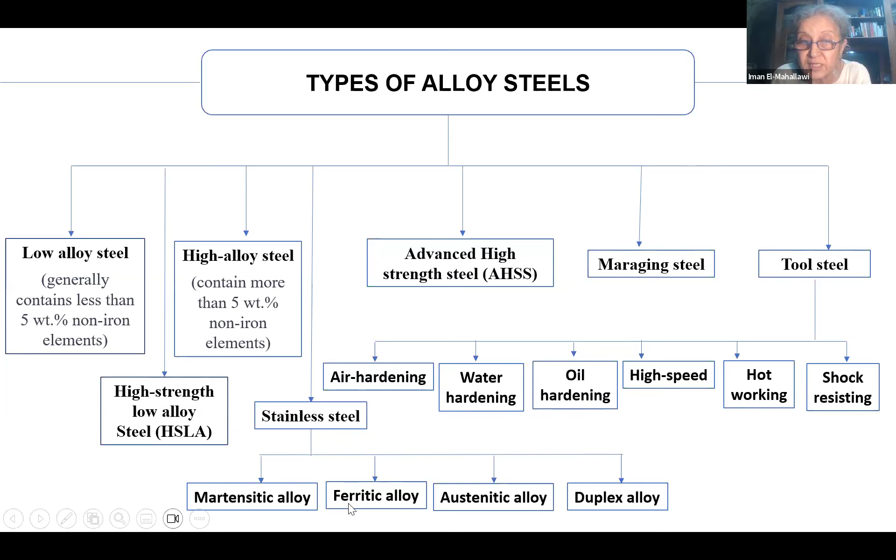So this is, from the scientific point of view, designation based on alloying elements and content.

We cannot skip the importance of designation. We have to understand the grading system because many engineers working in the market know steels by their designations. There are many designations to describe alloyed steels, but we shall focus on the AISI grading system, given by the American Iron and Steel Institute, and the Society of Automotive Engineers, the SAE. This is the one that most of us would have learned during engineering studies at university.

So it is a numbering system. The designation is a numbering system where you give a certain number. Usually the first number, from 1 to 9, refers to the type of the steel. Then you have 3 digits where the last 2 refer to the percentage of carbon, and the one after the first digit describes the other alloying contents in the steel.

Usually the grading of 1 is the carbon steels, 2 is the nickel steels, 3 is the nickel chromium, 4, which is very well known and common in the market, is the molybdenum steels. Then we have the chromium steels as 5, 6 are the chromium vanadium steels, 7 are the tungsten steels, 8 are the nickel chromium molybdenum steels, and 9 are the silicon manganese steels.

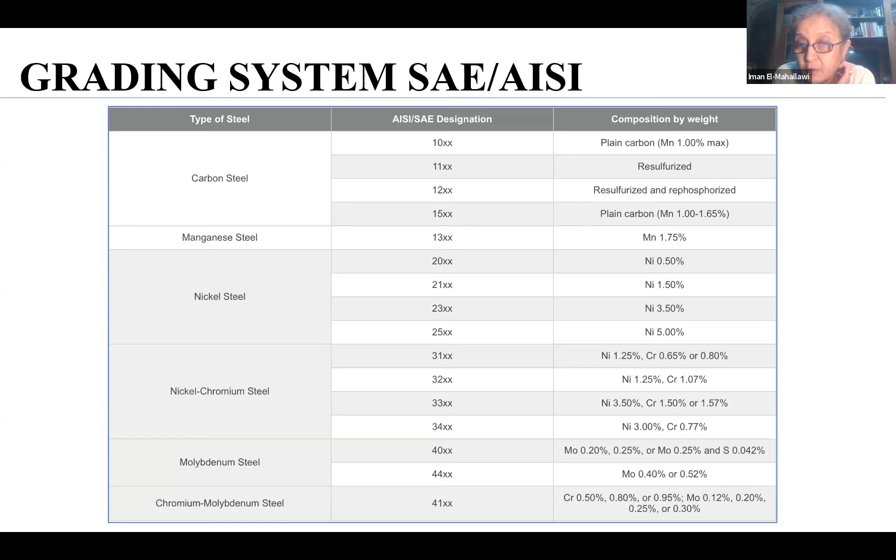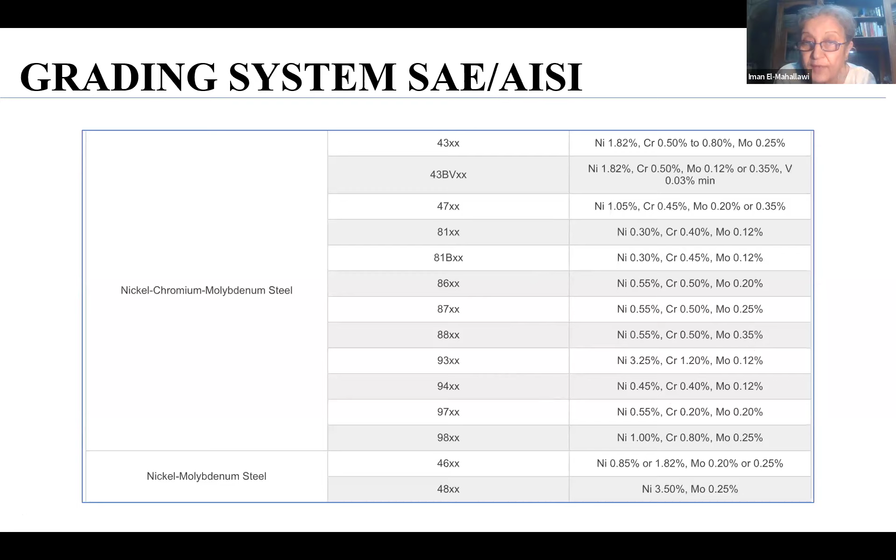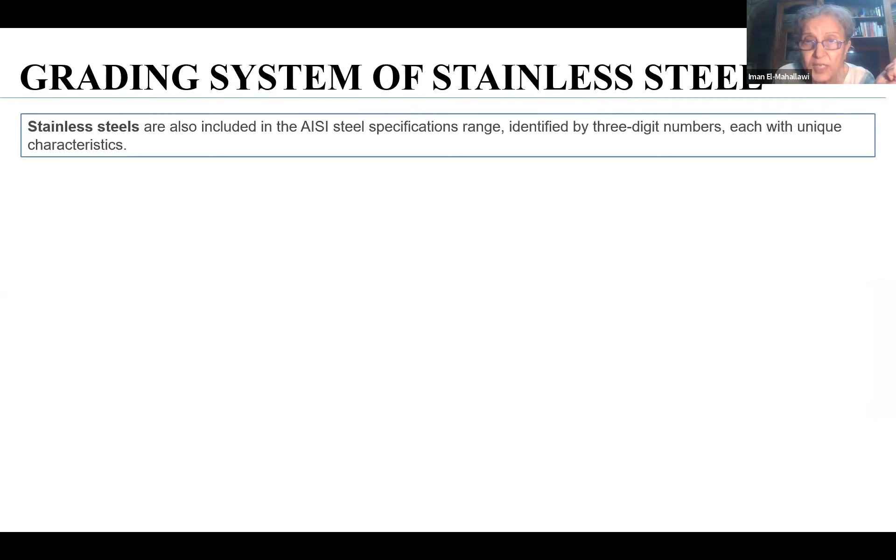So the stainless steels are included, as I've just mentioned, in the AISI steel specification range, identified by the 3-digit numbers, each with a unique characteristic.

The stainless steels have another grading system, also in the AISI, where we have the austenitic stainless steels, usually characterized by containing both nickel and chromium, and the structure would change to be austenitic. There is no time to review the iron-carbon phase diagram here, but we should remember that iron with carbon would be ferritic or pearlitic or whatever. When we add alloying elements, we get changes in this typical microstructure of iron, and we can promote the formation of other phases, just like austenite is promoted with a certain addition of nickel and chromium in a certain range.

And we have the well-known austenitic stainless steels, famous for surgery applications and home utensils and many other applications. Ferritic stainless steel grades are a little bit harder and stronger than the austenitic stainless steels. They are used for many engineering applications as well, and they would contain higher content of chromium at the expense of nickel, because nickel is an expensive element. So when we need higher strength and maybe different corrosion conditions, we can use them.

We also have the heat-resisting chromium alloys for high-temperature applications, martensitic precipitation stainless steels, the 600 group, the precipitation hardening groups, and the duplex stainless steels as well. So we have many different alloy steels.

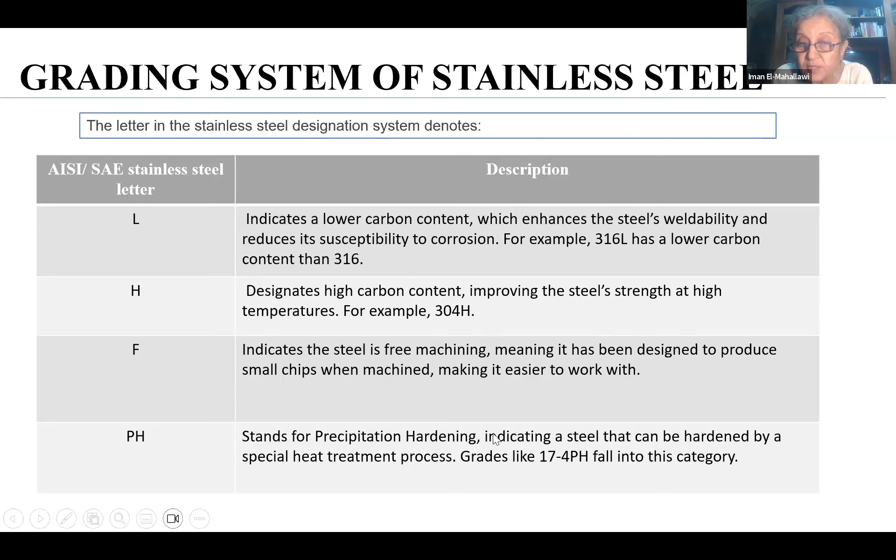In stainless steels, we should not forget that we have another suffix at the end of the number, which is L, H, F and PH. Usually the L would be low carbon or extra low carbon, the H would be high carbon content, the F will indicate the steel is free machining, and the PH stands for the precipitation hardening groups.

So this was regarding explaining the designations, and usually the designations are provided or developed by big institutes and societies. On top of them are AISI, ASTM, and ANSI. They are leaders in making and developing the grading and designation system for the alloy steels. And of course, we all know the standards and standard specifications that we have to abide by in validating steels for applications.

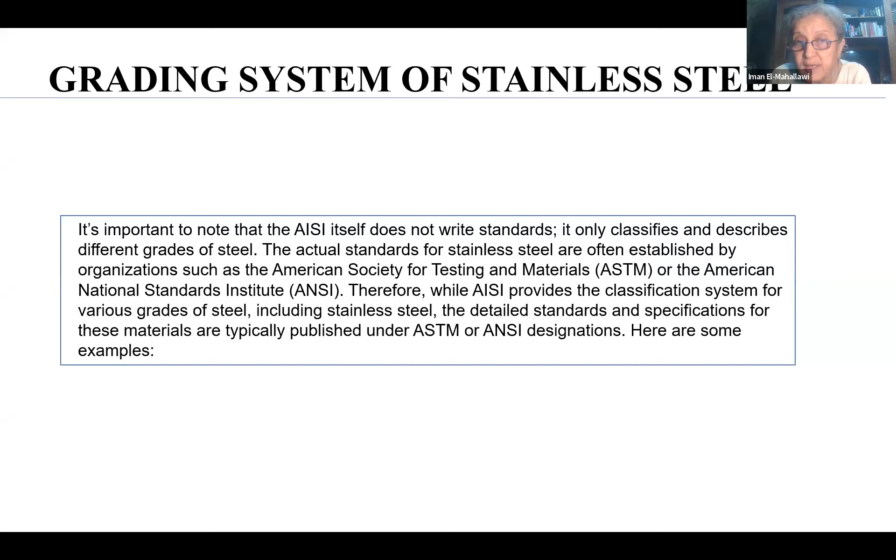We rarely add them to steels except for special conditions when we need, for example, machinability - then we may add some sulfur, but usually they should be kept at a very low value or concentration. This is the challenge with alloyed steels, because in carbon steels we may have a wider or more generous range for sulfur and phosphorus than in alloyed steels, and because their harmful effect is pronounced more on the properties of the alloyed steels if present in higher than the required values.

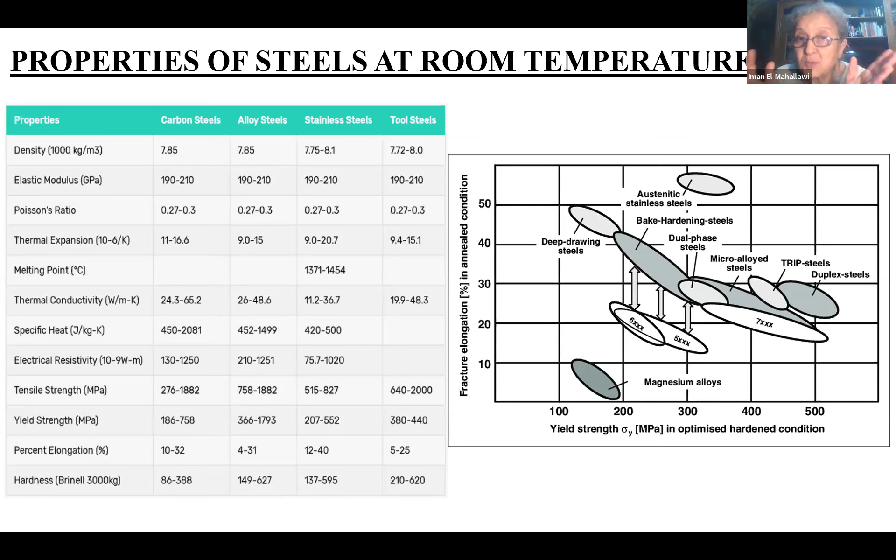Now, why are we talking about this? What's the importance of having alloying element content, microstructure, or phase? The importance is to obtain the properties we are looking for. The most important properties we look for in alloyed steels are high strength, toughness, ductility, corrosion resistance, wear resistance, and these are associated with other properties like thermal conductivity, specific heat, and electrical resistivity. Engineers think more about mechanical properties, but should not forget that increasing strength may deteriorate toughness, affecting other physical properties that should not be overlooked according to the application.

In many occasions, the designation would identify the specific steel type used for a certain application, whether valves, bridges, construction, or low pressure vessels, depending upon the required property relevant to the application, whether high strength, high strength with high toughness, or high strength with a certain amount of ductility.

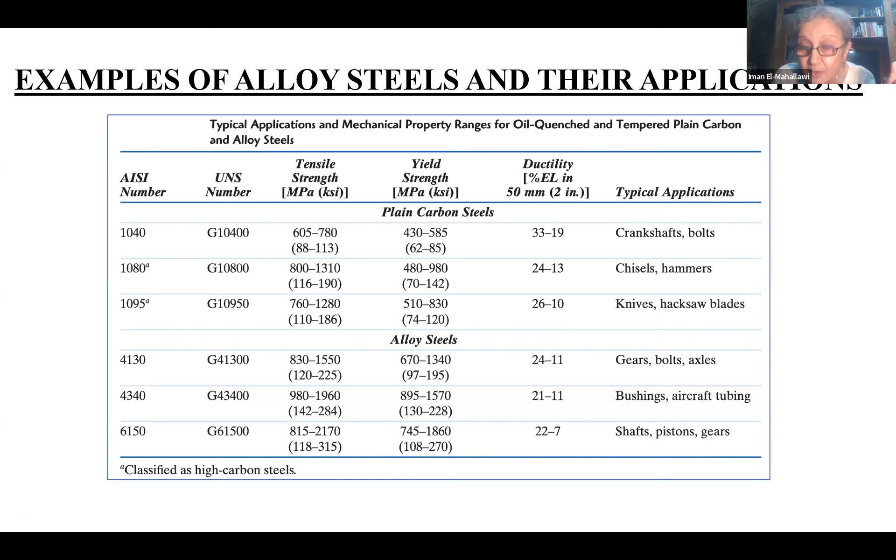And that's the driving force—why do we need alloy steels? That's why we are glad to have this event, to inform the market that we need alloy steels as much as we need carbon steels.

This presentation includes more examples for different conditions, and maybe the new term appearing here is 'annealed.' When we talk about alloyed steels, we should not forget that alloy steel is not only a matter of alloying elements—heat treatment is a very important challenge to achieve the required properties. You can never achieve your properties just by having the recipe for chemical composition; you have to have controlled heat treatment.

The most interesting thing is that you can have a wide range of properties depending upon the heat treatment. From the same composition, you can have strength no more than 400 megapascal, or controlled heat treatment can make you achieve strength more than 1000 megapascal. The whole idea about AHSS, advanced high strength steel, mentioned at the beginning of the lecture, is simply control of heat treatment.

You can double, triple, and quadruple the strength properties and control strength with toughness, because when we increase strength, this is usually done at the expense of toughness. But you can control both strength and toughness to exceed very high values just by controlling heat treatment. In this context, let's have a little revision—we need to remember the science and technology of heat treatment, which includes processes such as annealing, quenching or hardening, tempering, and now other treatments like quench partitioning and bainitizing, along with many other non-conventional methods apart from the three we learned at university: hardening, tempering, and annealing.

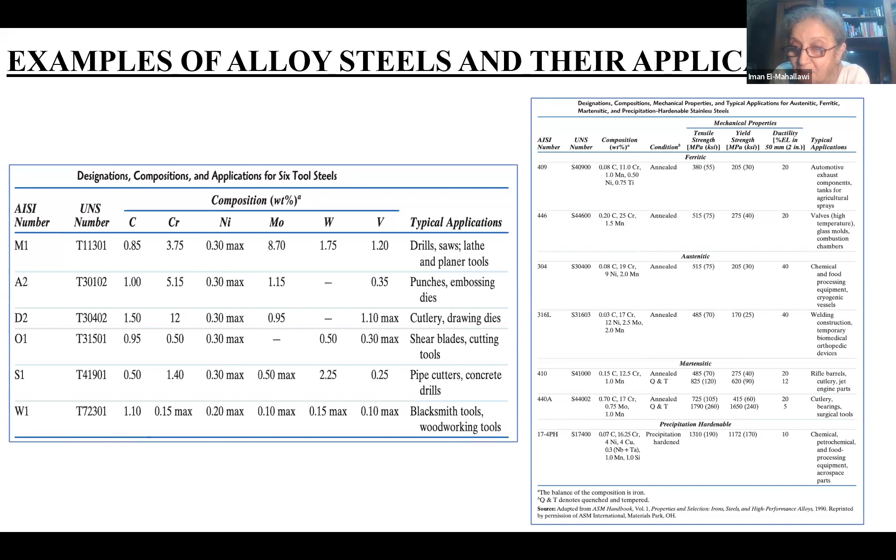Of course, this picture is just for showing the whole range of alloyed steel applications that we can obtain or achieve by alloy steels. So what is the challenge? If it is so simple, what's the problem? Why can't we produce it?

Actually, the challenge in producing and manufacturing alloy steels is associated with the production process. The production process is not as simple as carbon steels. Some steps are common, like charging, using the electric arc furnace, chemical analysis, and refining in the ladle furnace. But then you also have to charge the alloying elements, and you have to calculate and make calculations for the right alloying elements.

In many occasions, you need a vacuum degassing step, because you have to eliminate all the sources for entrapment or tramp elements presence. You have to get rid of the oxygen and hydrogen and other things that may get into the steel. You may need wire feeding, argon gas rinsing, and other processes before you pour your product and take it to either the continuous caster or the forging process.

So we have one challenge during the melting and production process, and another challenge during the heat treatment. If the heat treatment is not controlled, you do not get the properties that you want. Of course, the manufacturing and heat treatment would be manifested in a microstructure, which makes us achieve the properties we are looking for.

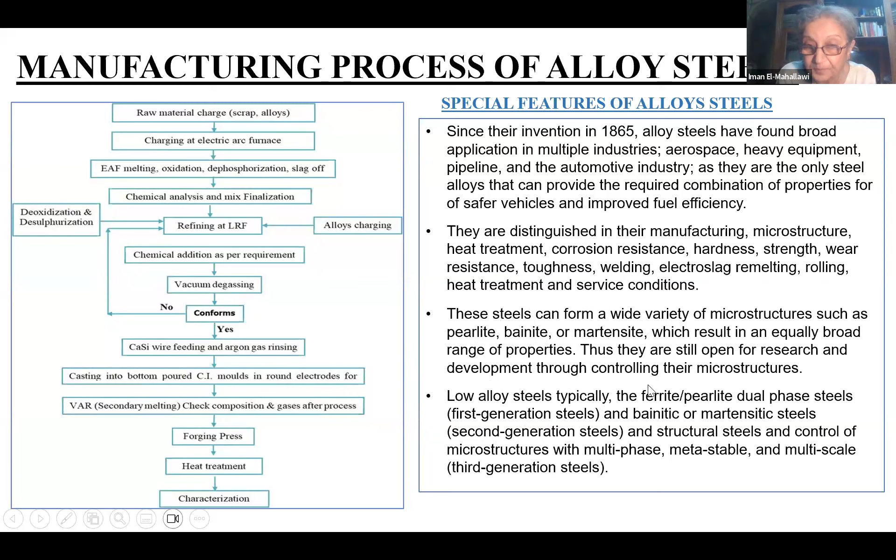So this manifestation is actually obvious in the new grades of steels. We had the first generation of steels which were highly ductile, but the yield strength was low. Whereas the second generation, we could achieve high yield strength, but at the expense of ductility and toughness. The third generation steels that are now investigated and actually in the market are like TRIP and TWIP.

Transformation-induced plasticity and twinning-induced plasticity, quenching and partitioning - all these groups of advanced steels can achieve strength and toughness exceeding 2 times the conventional types of steels, despite the fact that they are based on the same chemical analysis.

Just a quick reminder of the heat treatment processes that we have learned earlier: annealing, normalizing, hardening, tempering, mar tempering, and austempering, bainite forming - all these should be kept in mind when we plan for producing alloyed steels of special properties.

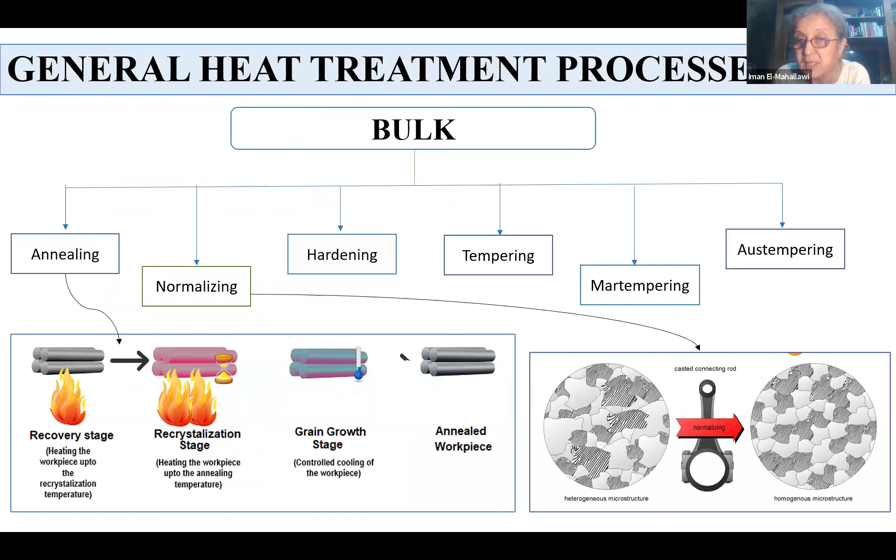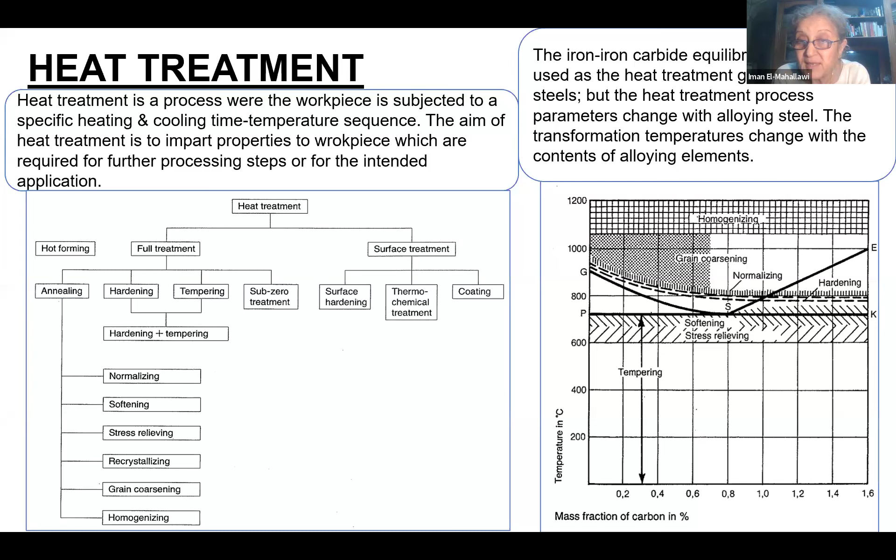Again, a flow chart as a reminder for those who have forgotten heat treatment, and of course the phase diagram is important in this aspect. Here is an example of a typical heat treatment process for alloyed steels, where you can find that you need 2 stages of hardening, 2 stages of cooling, and tempering in many applications, unlike conventional carbon steels where you do not need this stage.

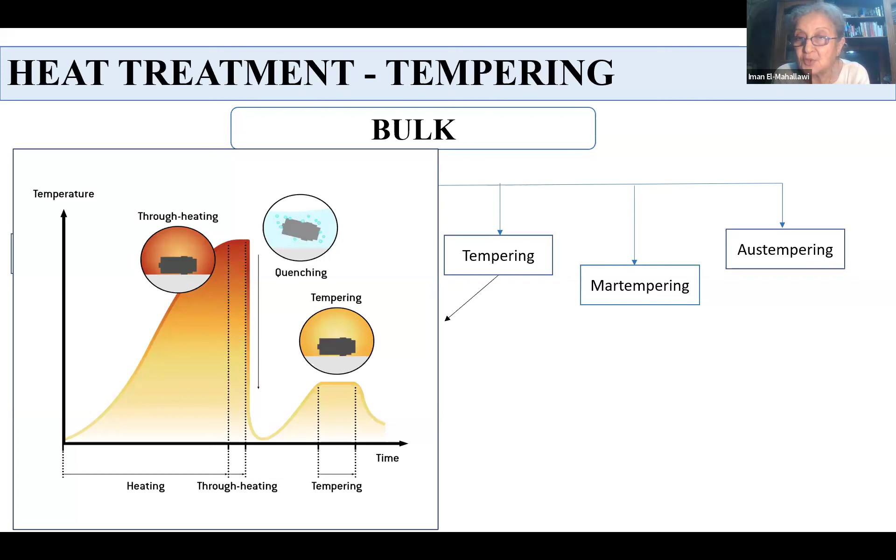Other examples for different alloys. Okay, maybe mar tempering and austempering are not very well known, but they just mean that we temper in the range of martensite, or we temper in the range of austenite, to achieve the microstructure that we need.

We also always have to remember that sometimes over-tempering may produce some defects, because we get secondary carbide formation, which may harm the toughness of the material. So we should actually control not only the hardening stage, but also the tempering stage for achieving the required properties.

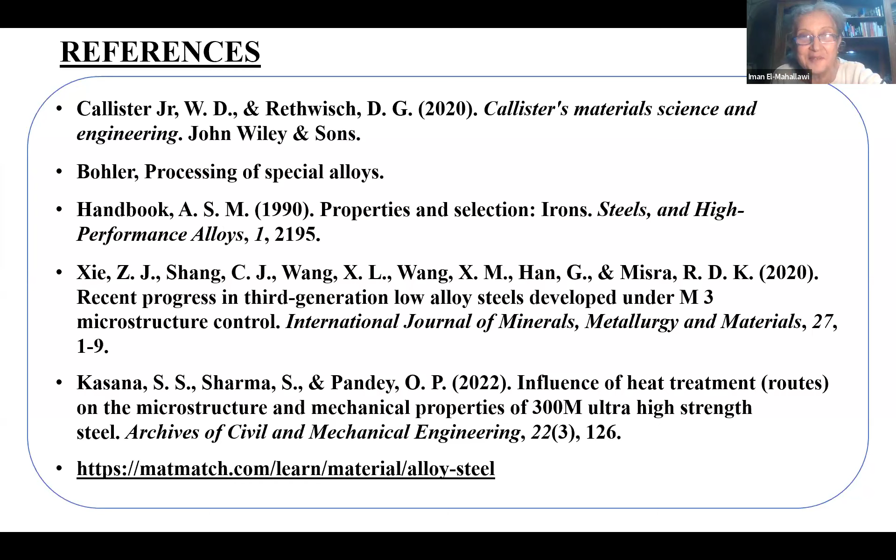Thank you. Thank you, Dr. Iman. This is really very, very good presentation. It reminds me of a lot of stuff from during my studies at university. I have a question for you.

So in the United States of America, there is a trial to make something called high strength steel. This is mainly for automotive, to use very thin, light sheet in the automotive industry. Can you give us an explanation of what high strength steel is, and what is the idea to approach this in industry?

Yeah, of course, doctor. I do not live in the United States, but I know these advances are happening, and this group is generally called AHSS, Advanced High Strength Steels. The idea is that you control the heat treatment and chemical analysis to obtain, for example, transformation-induced plasticity. You develop alloys by controlling the alloying elements and heat treatment, so that with heat or deformation, you will have extra properties added. Instead of losing the property, you gain additional properties through transformation, where one phase transforms to the other.

First of all, we will speak about what is the special steel. There was a good introduction done by Dr. Mahallawi. When we are speaking about the definition for the special steel, to be clear for everyone, it is the target to have the clean steel of gases and non-metallic inclusions.

And this cleanliness should be done starting from the scrap till all the production procedure, until reaching the final product to be suitable for heat treatment, to reach the actual desired mechanical properties and grain structure, which is already specified from the end user, because special steel always goes to the end customer for its special application.

If you are talking about the main characteristics of special steel, first, as normal, is the chemical composition. For each kind of steel, we have to control strictly the chemical composition for every grade. Some grades are very large for the end customer, then they are asking to have this one in a tight, specific limitation for some items. So it should be considered because it affects its final application.

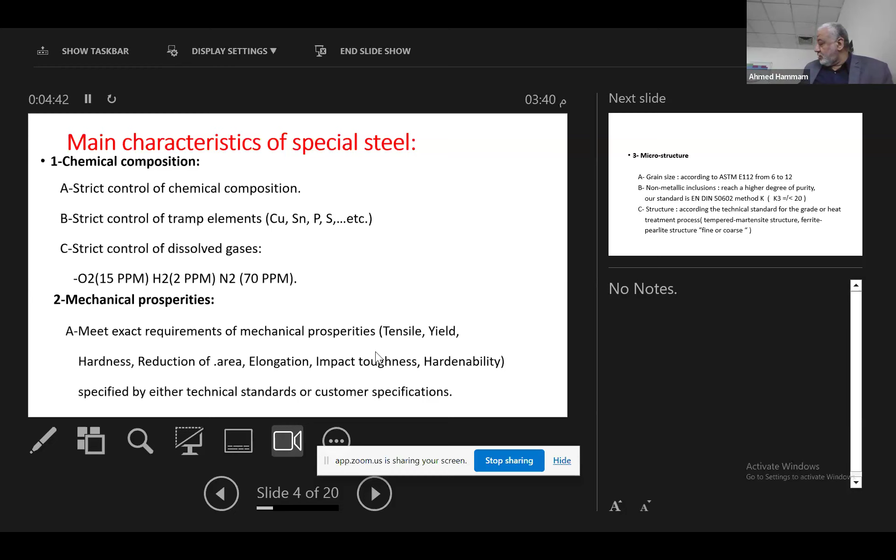You always say special steel is for a specific application, because you can produce the same steel grade suitable for more than one application. And this variety of applications gives a limitation for each component of the chemical analysis, and also for final mechanical properties like the tensile, hardness, reduction of area, toughness, and impact toughness. All this is controlled and gives the results appropriate to the end customer.

The third one is the microstructure. We have to be very keen to keep the grain size and the shape of the grain in a manner that there is no distortion, and it should be according to the ASTM standard from 6 to 12. Also, the definition for the grain size should be controlled according to the final application. You can always say final application is the master key to succeed in special steel.

The second part for the microstructure is the non-metallic inclusions, which should be of a higher degree of quality. We keep the standard of K3 approximately equal to or less than 20. The structure should be adjusted even during production on the line itself, or afterward by heat treatment, in order to keep the desired microstructure with the desired grain size.

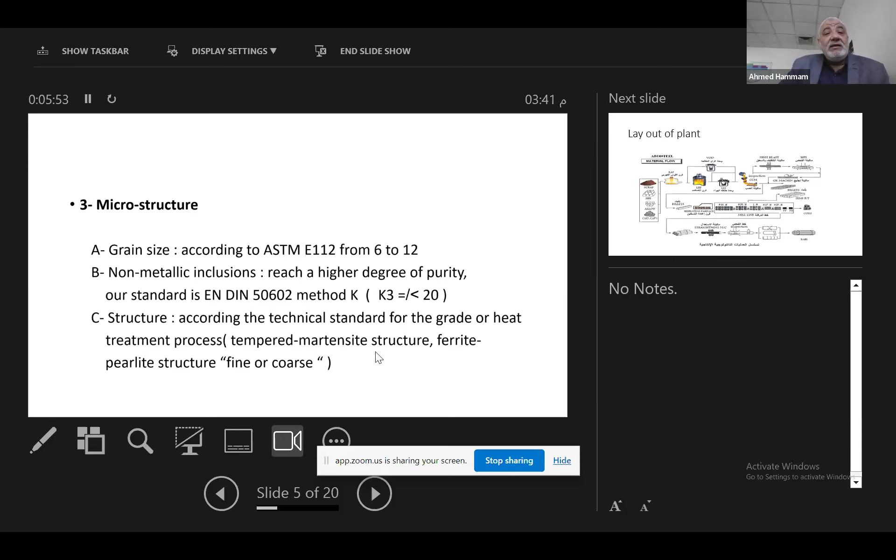If you are looking to a plant operating special steel, first of all we have to be keen about the scrap segregation. The scrap segregation should be done according to the chemical composition of the scrap and the desired steel grade we need to produce. So we have to have the scrap divided into stainless steel scrap, high manganese scrap, high chrome scrap, like this. It should be segregated well, and if the segregation is done well and arranged for each steel grade, then the results will be much easier in the electric arc furnace.

After that, in the electric arc furnace, normally you get rid of the phosphorus and sulfur, and after that, putting the steel in the ladle furnace. In the ladle furnace, we can control the chemical additions for the different alloys in order to reach the desired final chemical composition.

After the ladle furnace, we are going to the vacuum degassing. After the vacuum degassing, the billet is coming from the CCM machines, which is considered also some items to be considered for the casting. It's a closed casting for the special steel.

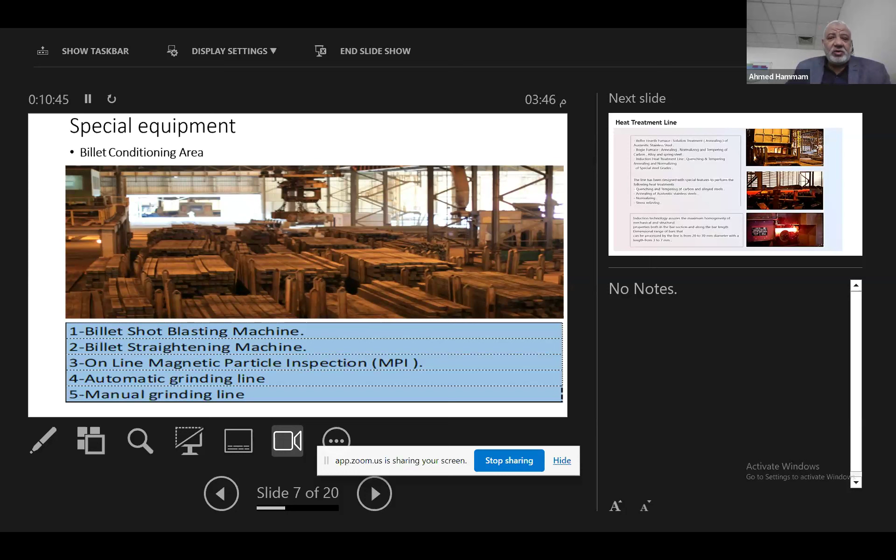The online magnetic particle inspection, MPI, should be done for this one, and the automatic grinding or manual grinding according to the case of the billet.

Speaking from the in, we have to speak about the out, meaning after the final product, we can make all the post-heat treatment for the material. For this, we have around 3 kinds of furnaces. The first one is the solution furnace for the treatment by annealing austenized stainless steel.

The second one is the bogie furnace for annealing, normalizing, and tempering, alloy and spring steel and others. The last one is the quenching and tempering, which gives good results according to the special application, especially for the automotive industry. For this, we have the quenching and tempering, and we can also do annealing for austenite stainless steel, normalizing, and stress relieving, to ensure that by the induction we are getting the constancy of the structure and the mechanical properties along the bar cross section and the length of the bar itself.

The main task, I think, is the vacuum degassing and the continuous casting. These two items are the critical items in special steel production application.

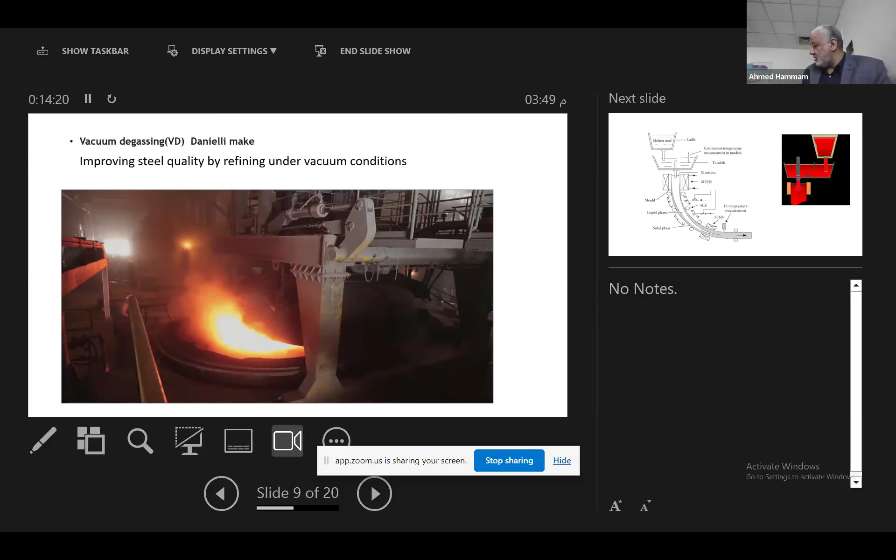After that, we are going to the continuous casting machine, which starts by the molten steel in the ladle. So there should be a shroud between the ladle and the tundish, and also another shroud up to the mold. So it's a closed casting procedure.

By this procedure, we can control and ensure that the final results will be in good condition, followed by the first and secondary stirring in the mold to keep homogeneity for the final product.

Now we got the materials that we already nominated according to the standard and produced for these steps. If we can get here the same as already presented by Dr. Iman in the previous presentation for the material - here we are speaking about carbon steel and alloy steel. 5% is approximately the ratio for low alloy and high alloy percentage ratio.

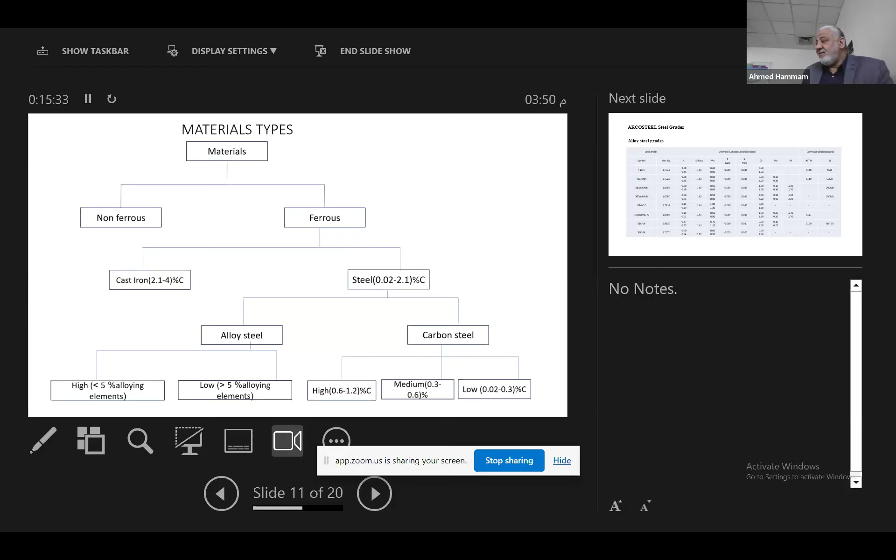For the carbon steel, we have the high carbon steel, medium, and low carbon. These are examples for the grades, which are classified according to some applications.

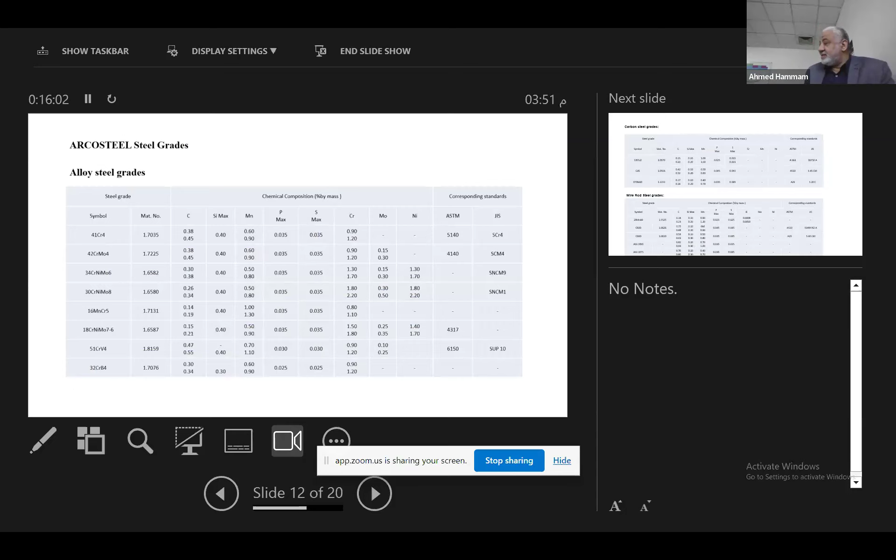So these are the alloy steel grades, the different kinds of steel grades: 42 chrome moly 4, 34 chrome nickel moly 6, 30 chrome nickel moly 8, 16 manganese chrome 5. All these depend on this as an alloy steel for special application.

The carbon steel grades are S355 J2, which is commonly used for a lot of applications in automotive, C45 and 70 manganese 20.

The wire rod steel grades are slightly different because they reach up to the AISI grades 1085, 1075, used for wire drawing applications like the sleepers for the railways, used for strands also, and this wire application.

The free cutting steel grades should be controlled, and for free cutting we always depend on increasing the ratio for the sulfur, which is known.

Also the grades of tool steel like 56 nickel chrome moly V7, this is one of the famous tool steel grades. The bearing steel 100 chrome 6, which is a critical one to reach casting under

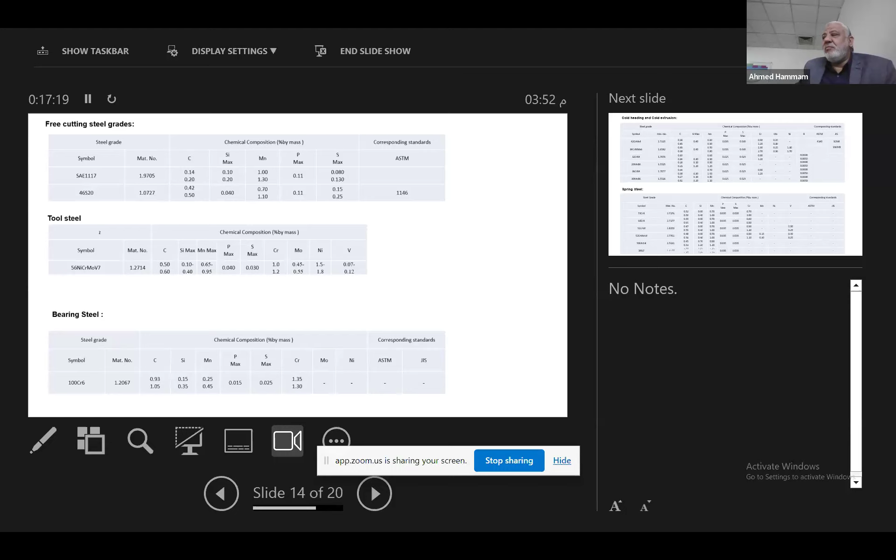1% of carbon. The cold heading and cold extrusion steel grades are also produced. The spring steel 55 chrome 3, which is normally used for automotive spring plates, 60 chrome 3 also.

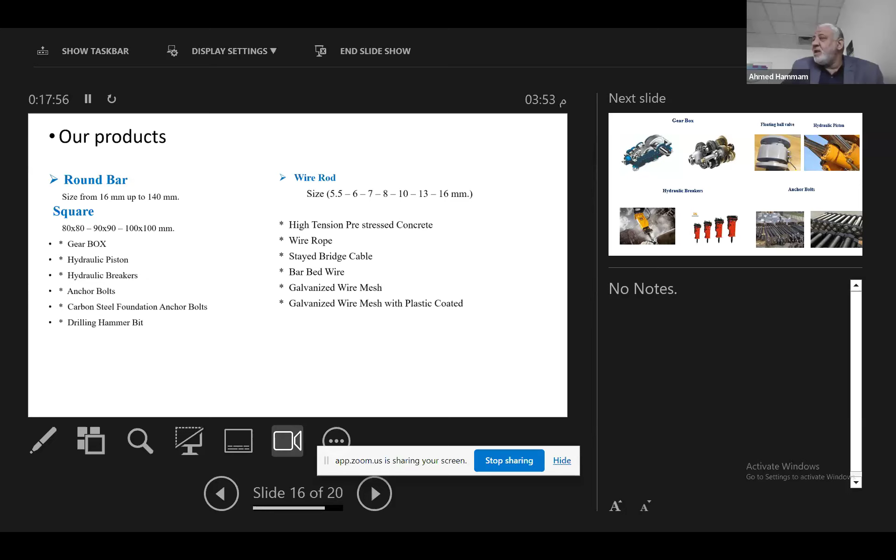The products are divided into round bar, which is produced in Arco Steel from 16 millimeter up to 140, and the square from 80 by 80, 90 by 90, 100 by 100, and the wire rod sizes from 5.5 up to 16 millimeters. The application for the bar mill is concentrated on hydraulic pistons.

It's used from the bars, the floating ball valves - by the way, this one is produced from our production, and we are proud to have this also made in Egypt.

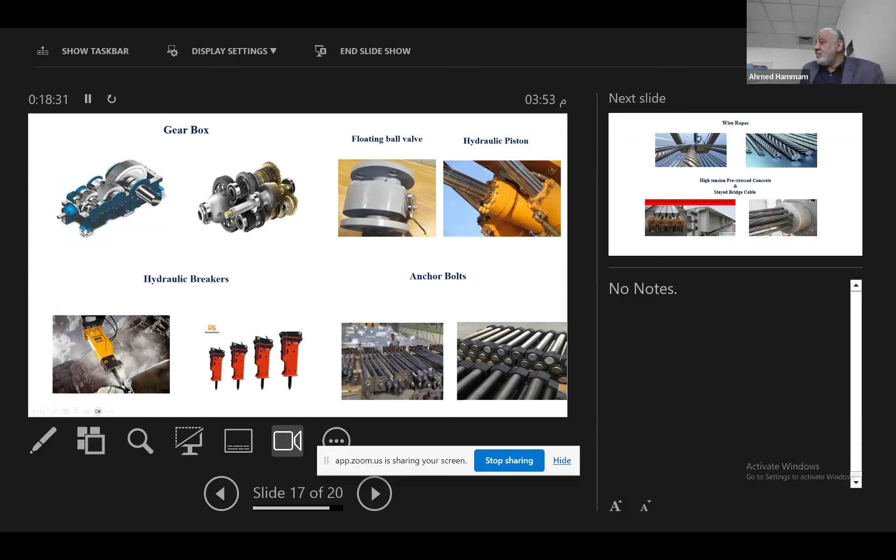The gearbox axis, we are producing the grades for this one. The hydraulic breakers for different applications and for mines, and the anchor bolts for different application also.

For the wire, there is wire rope and PC strands, and now we can say there is a boom in producing wire rope and wire drawing, and they have PC strands, which is giving good results. Also, the applications for this one go for construction purposes and bridges.

If we can speak about the achievements on steel production, we can say that we have to be very careful during the production of special steel, because if we sacrifice some quality items or overdo the cost reduction, then the final product could not reach the desired level of quality.

We aim to get cost reduction by segregating the scrap with very tight and constrained rules to get a good melting profile. So we segregate the scrap as stainless steel.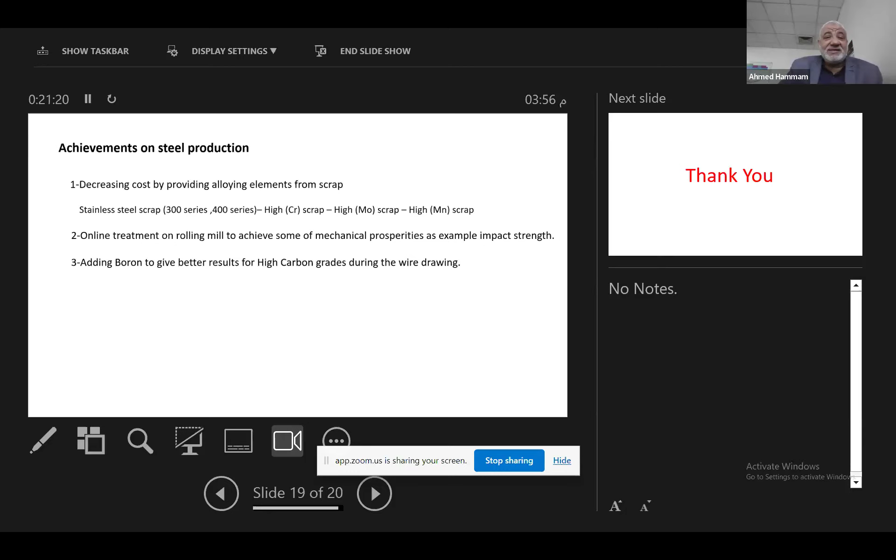1670 megapascal. Thank you very much. Hope that I can introduce something about special steel during this short time.

Thank you very much, Mr. Hammam. Really very good presentation, practical from the steel plant. I have some questions for you. First question from my side.

The big challenge for steel producers, especially steel producers, is that you have thousands of grades, and every grade needs to go to the customer with different shapes, thousands of shapes. So sometimes customers need a small quantity of this shape with this grade to go to this customer, and another customer needs something else. How can you deal with this logistically? How can you produce different kinds of steel, thousands of grades, thousands of shapes, based on customer demand? How can you make this balance in the production site? Actually, it is one of the challenges for the manufacturer of special steel.

Really, you are getting to the harmful point for this kind of production. You are correct. We have a lot of requests, maybe not exceeding 5 ton, 7 ton, 8 ton from one grade to the other. So we are doing like a puzzle, which is taking a long time, keeping in mind not to increase the number of size changes during the rolling, which has reached around 55 to 60 changes per month, which is huge for any rolling mill, affecting the final

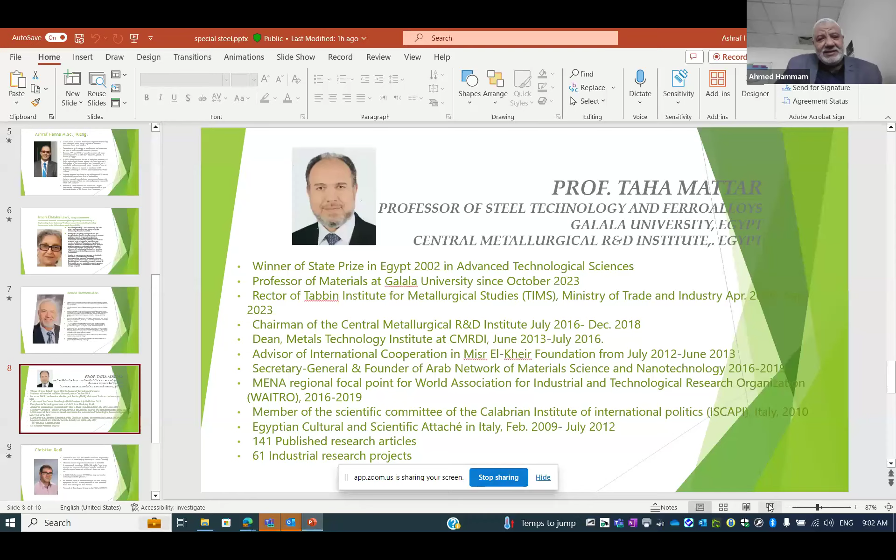Thank you very much, Mr. Hammam. The third speaker here is Dr. Taha Matar, who also has a very famous name in most institutes talking about steel. He's a professor of steel technology and ferroalloys at Galala University. He's also head of the Central Metallurgical R&D Institute in Egypt.

Dr. Matar is the winner of a state prize in Egypt in 2002 in advanced technology science. He's a professor of materials at Galala University since October 2023. He's also head of the Tabbin Institute in Metallurgical Studies, Ministry of Trade and Industry. He was chairman of the Central Metallurgical R&D Institute from July 2016 to December 2018, dean of Metal Technology Institute from June 2013 to July 2016, advisor of International Cooperation in Misr El Khair Foundation from July 2012 to 2013, secretary general and founder of the Arab Network of Materials Science and Nanotechnology from 2016 to 2019, and a member of the Science Committee of Calabrian Institute of International Politics.

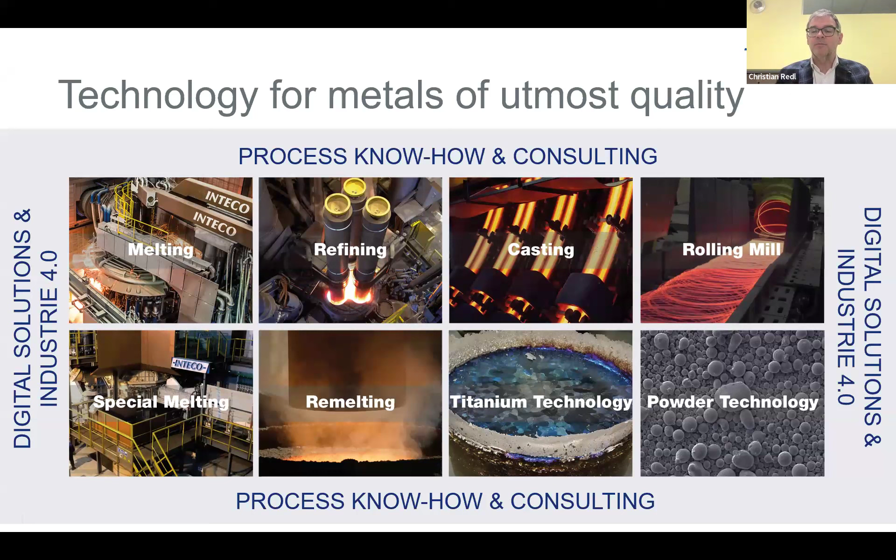Besides that, we also supply equipment for titanium technology and metal powder production. We are located in Austria, with our head offices in Bruck an der Mur, surrounded by some steel plants in Austria like Voestalpine, Bohler, and so on. We were founded as a consulting company in 1973 and have since developed into a complete equipment supplier. We are globally active with 10 subsidiaries around the world, with a turnover of approximately 80 to 100 million euros per year.

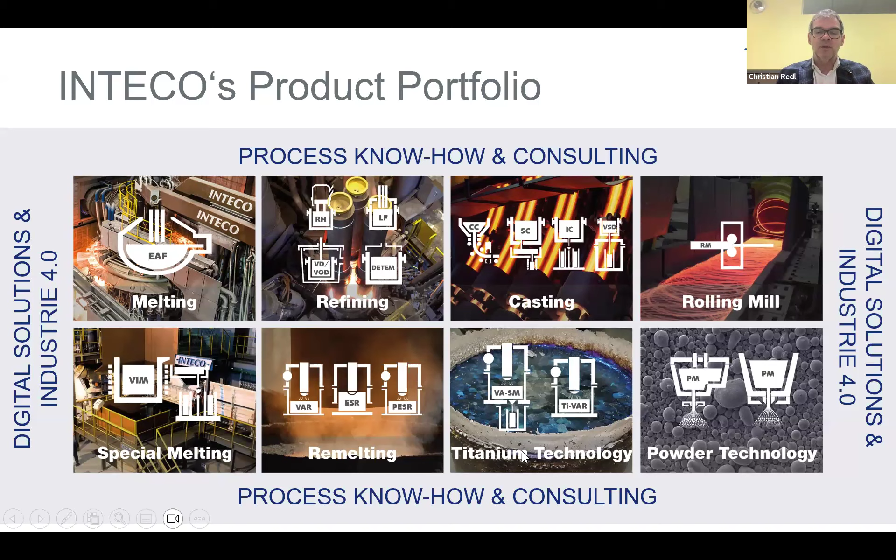As I said, we cover the entire production route for steel making, starting usually with the electric arc furnace, and then we have the entire portfolio for refining equipment like ladle furnaces, RH plant, VD, and tank degassing facilities. We also have in our product portfolio all kinds of casting facilities, and then remelting and rolling mill, but I will skip this for this webinar.

Of course, this has also been addressed by Ahmed and Professor Iman in their previous lectures - why we do vacuum treatment. In the very early days, it was mainly done to reduce the hydrogen content in castings, which is still done today for forgings, rail steels, or heavy plates. This was the main driving force in the early days. Then came the invention of ultra low carbon steel grades, which can be efficiently produced by decarburization under vacuum to carbon contents below 30 ppm or less.

And of course, sorry, go back one - the low oxygen partial pressure under vacuum favors carbon oxidation over chrome oxidation, which is very important if you're producing stainless steel or very high alloyed steel with high chromium content. The reason is simply that if you're blowing oxygen to reduce the carbon under atmospheric conditions, you will oxidize a lot of the chromium you added as an alloying element.

If you're producing mainly stainless steel, you might go either for the AOD process, and if you're also producing tool steels or a mixture of steels, then you do a vacuum treatment like VOD, vacuum oxygen decarburization. Nowadays, a lot of steel grades like interstitial free steel, deep drawing steel, and tire cord steels require nitrogen contents as low as maybe 30 ppm as well.

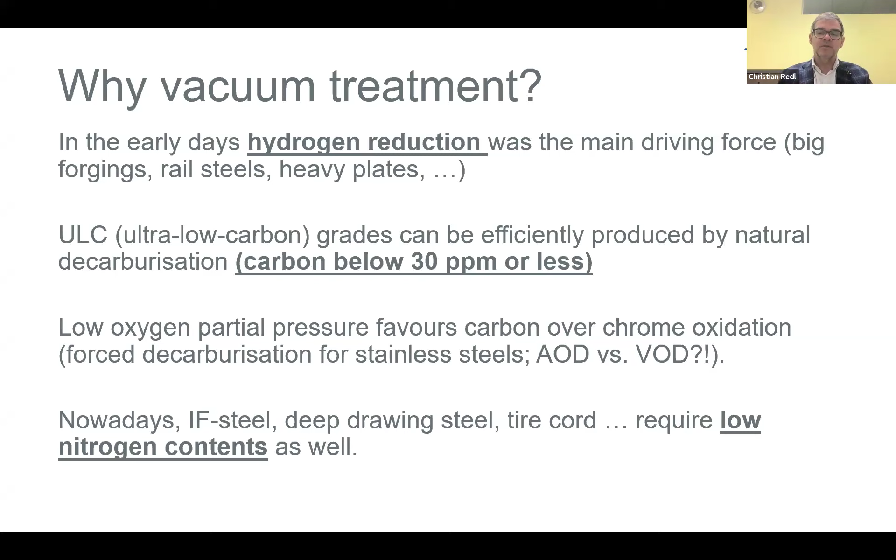There have been a lot of different degassing technologies introduced over the years. Vacuum treatment has been used already since the early 1930s with some pilot plants.

In the very early days, there was a lot of ladle stream degassing and vacuum ingot casting, shown here on the top left side. This is nowadays mainly used for large forging ingots, very large ones. The biggest plants built are around 700 tons. Here you're mainly trying to reduce the hydrogen content.

For the integrated mill, which is supplied by a blast furnace followed by a BOF converter, there is mainly RH degassing or DH degassing. These are circulation type processes, whereas more or less state of the art for alloyed or high alloyed steel production are the ladle treatment processes, like vacuum tank degassing or vacuum ladle, which we call the DETEM process. I will show you later some slides about it. Or also the VOD, where you combine a ladle tank degasser with an oxygen lance to blow oxygen and make a forced decarburization.

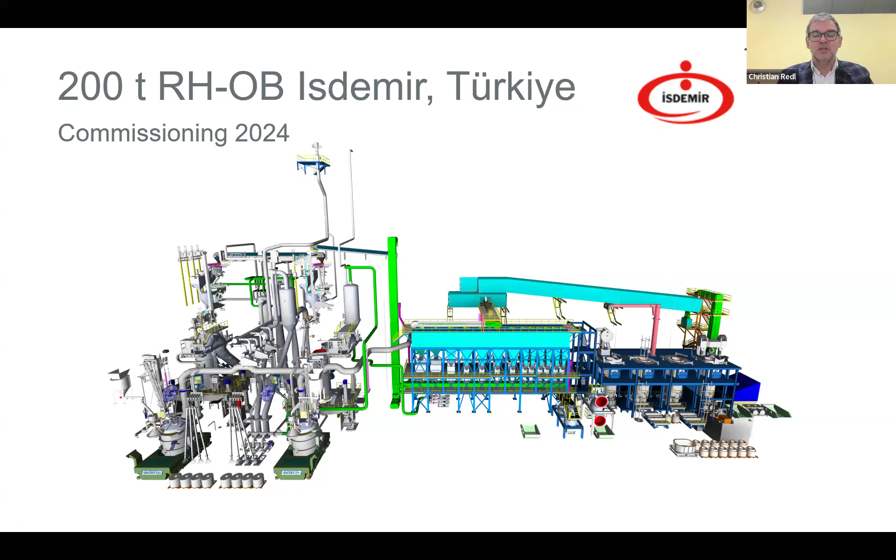As I said, RH degassers are more used for the integrated mills. Here is one example of a plant which was installed and will be commissioned during 2024. It's a 200-ton RH with oxygen blowing for Isdemir in Turkey. You see very huge dimensions for this 200-ton unit with 2 treatment stations and a very extended alloy adding system for material handling.

So why is one more suited for integrated mills and the tank degasser mainly used for high alloyed steel grades? There is, of course, an intensive metal-slag reaction possible for the tank degasser, which is not possible with the RH, because you're inserting the snorkels and only circulating the liquid steel without a big slag reaction. In the tank degasser, you have an intensive metal-slag reaction, which is beneficial for the removal or modification of inclusions, and therefore improving steel cleanliness.

With the slag, we also have the possibility of very good desulfurization during the vacuum treatment. Of course, also very good degassing efficiency, and we can make a deep decarburization.

Usually the circulation type degassers are faster, but the tank degassers are, of course, in the range of cycle times adequate for EAF production. Mr. Ahmed told us about 31 to 32 minutes of treatment time in the tank degasser. This is very good in line with the typically fast tap-to-tap times of electric arc furnaces, which is not as easy to align with BOF converters.

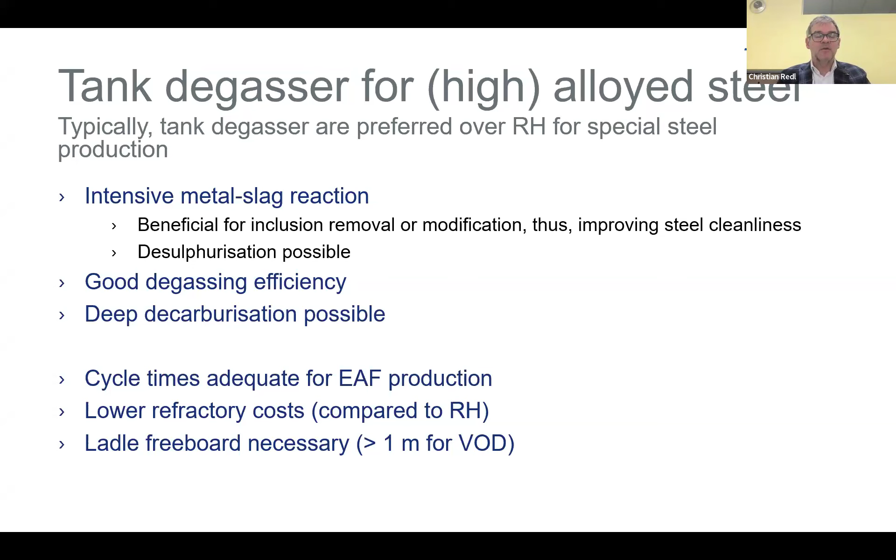Therefore, BOF converters usually prefer RH degassers. As we use the ladle also for the treatment, we have lower refractory costs compared to an RH. The disadvantage of the VOD might be that we need some ladle freeboard to make this treatment - typically 1 meter from the top of the metal until the top of the ladle.

There exist different types of ladle treatments. The first one, shown on the left side, is the DETEM concept, the vacuum ladle, where you do not have a tank, but simply seal the ladle with a special flange using a vacuum cover, and evacuate only this very small volume. This is usually recommended for very small heat sizes, typically for small scale steel plants dealing with heat sizes up to 20 tons. So you have lower heat losses during the treatment and a low volume to evacuate, meaning the vacuum pumps can also be designed in a smaller size.

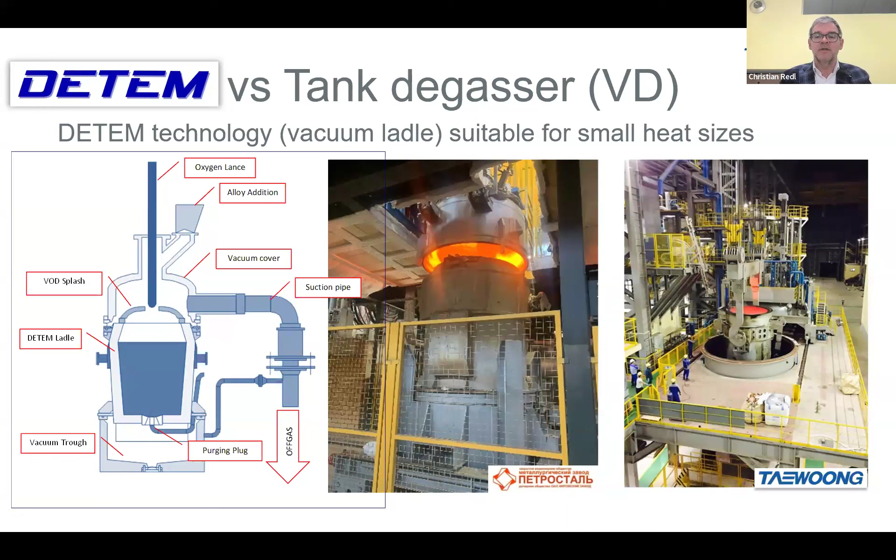The typical installation in a special steel plant is nevertheless the ladle tank degasser, where you place the ladle in a vacuum tank and seal the entire vacuum tank with a ladle cover, shown on the right side. Here we are showing a typical installation for a heat size of 120 to 150 tons, installed in a steel plant in Korea.

Of course, there are many different design types of this tank degasser, so I'll just review a few of them. One is, of course, the heat size. At INTECO, we recommend this DETEM type, this vacuum ladle, for small heat sizes smaller than 20 tons, and the tank degasser for the bigger ones.

What can be observed nowadays is that mechanical vacuum pumps are the state of the art for producing the vacuum. In former days, it was more the steam-driven vacuum pumps, but at least in electric arc furnace-based mills, nowadays there is a trend going to the mechanical vacuum pumps.

The number of tanks, either 2 tanks or 1 tank, is more or less completely depending on the required capacity and the available treatment time. If it's a movable tank, or if we are moving the cover, this is mainly dictated by the available space and how to fit the plant into the mill's layout. The final carbon content and also the product mix dictates if you need oxygen blowing lances for forced decarburization, or you only go for a simple vacuum treatment. The auxiliaries which you're installing on your vacuum plant, like a wire feeder or alloy addition system under vacuum, are mainly given by the product mix which you have in mind.

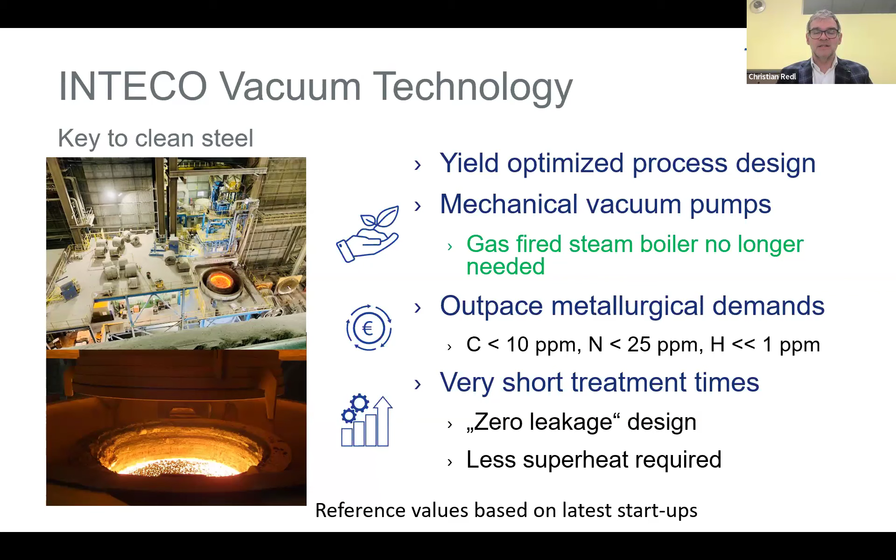To reach very short treatment times, of course, you have to ensure that your plant is tightly sealed, so you have an effective vacuum treatment.

So this is one of the examples which we installed in 2022 in the United States, which I present you some plant components. It's a VT plant for 108 short tons, which are roughly 98 metric tons. It runs with dry mechanical pump. It's a single station with a cover car.

You see it on the right side. You move the cover on top of the tank to seal it. Suction capacity 170 cubic meters per hour. Air leaks, we should tend to have it at least below 20 kilo per hour to have a very good degassing capacity. As we do not have an oxygen blowing lance, but doing only vacuum treatment, the freeboard is roughly 400 millimeter. If we would have VOD with the oxygen blowing lance, we would go for 1 meter.

Pump down times should be lower than 5 to 6 minutes, also in line with what Mr. Ahmed said, that they have pump down time to below 1 torr or below 1.3 millibar in 6 to 7 minutes, so that we have sufficient time for the vacuum treatment.

Here we see an overview of the plant components. On the left side, the mechanical vacuum pump to produce the vacuum, then there is a filter and a cyclone, because we are sucking off a lot of dust during the vacuum treatment, and not to destroy the vacuum pumps, there is this filter system.

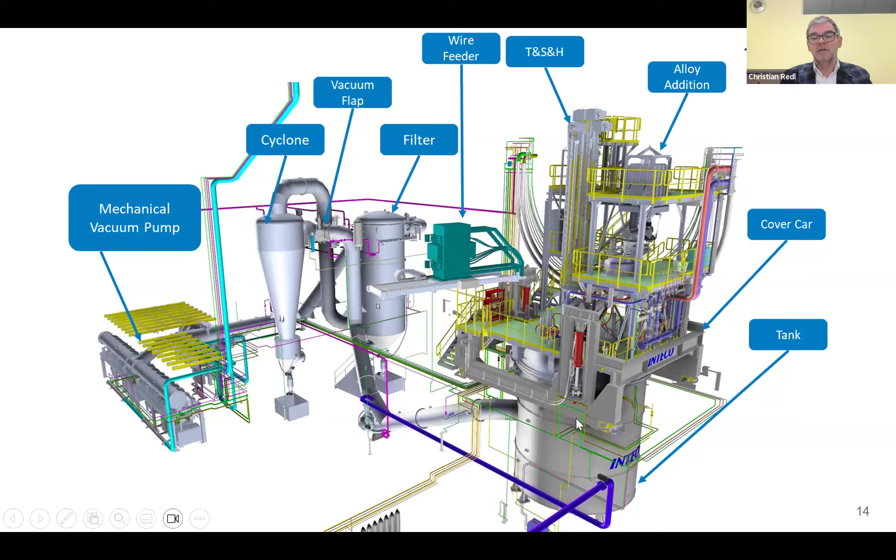Then we have wire feeding for very precise alloying of the melt, and temperature and sampling manipulator to take the samples and measure the temperature at the end of the treatment. An alloy addition system to make alloy addition under vacuum with a vacuum tight sealing. The cover car, and of course the tank, as main components of the plant.

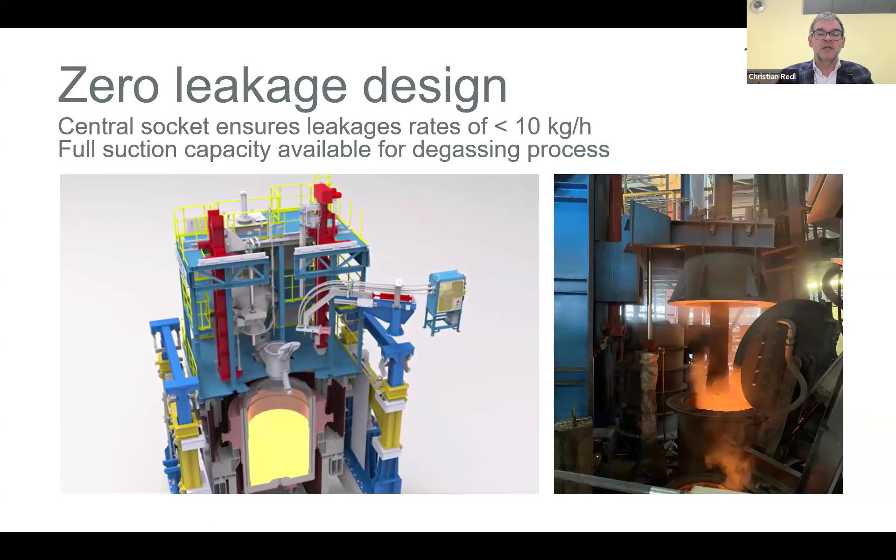We have developed over the last year what we call a zero leakage design. We want to avoid a lot of openings in the cover, which we have to seal during the treatment. So therefore we are going for this central socket. Through the central socket, we can insert the oxygen blowing lance if we have a VOD, and we can make wire feeding and temperature and sampling measuring only at one feeding point. Therefore, the leakage rates can be as low as 10 kilogram per hour, which allows a smaller design of the vacuum pump, a very short pump downtime, and very low final vacuum pressure.

The key aspects for proper degassing are, of course, the degassing time. It should be as long as necessary, but as short as possible to avoid temperature losses during the vacuum treatment. Of course, the longer the degassing time under deep vacuum, the better - the lower will be the gas content of the melt. And the same is true for the vacuum pressure: the lower the vacuum pressure, the lower the final gas contents of the melt will be.

Of course, to reach a very low vacuum pressure, you have to minimize the pressure losses, which we achieve via our zero leakage design, and also to minimize the leakages itself, a design criteria. But this is also maintenance related. You have to do good maintenance to minimize your leakages on the plant.

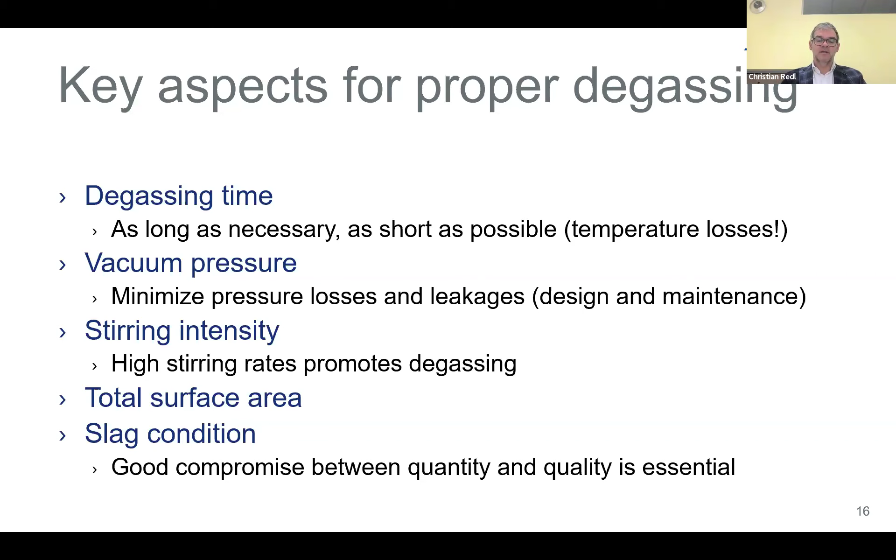The stirring intensity, you stir with a bottom plug, usually argon stirring. High stirring rates promote the degassing efficiency. Degassing efficiency is also influenced by the total surface area. This is something you can influence to a certain extent, dependent on the height to diameter ratio of your ladle, and also dictated by the slag, which determines what surface area can be exposed to vacuum for good degassing efficiency. The slag condition is always a compromise between quantity and quality, and this must be decided case by case for each heat and steel grade.

Once again, an example from Nucor Steel: steel cleanliness is also improved. Here we see a reduction of inclusions by roughly 27%. This is due to the very good slag metal interaction, where a lot of inclusions can be separated into the slag. Of course, there is also modification of the inclusions. This is a topic discussed very broadly in the literature - what is the mechanism behind this inclusion modification and inclusion removal during vacuum treatment?

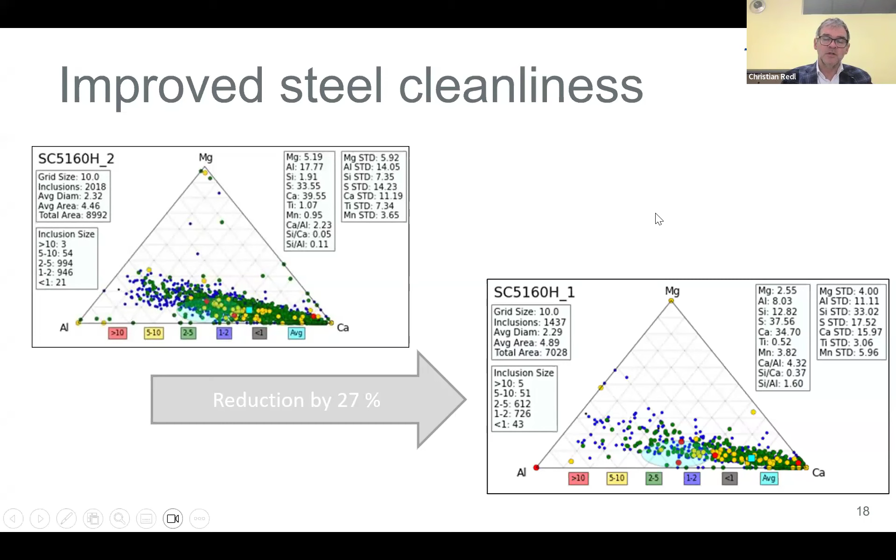What's important if you're talking about efficient degassing is also the digitalization. Nowadays, it's very essential to have very accurate process control and process modeling. There exist process models to simulate or calculate the hydrogen and nitrogen content, and also temperature prediction, and also to include an alloying model, to have an efficient and cost-effective degassing operation. And of course, you always try to hit your target content as close as possible, and this helps if you have a very good process calculation. This might also save you some samples in between, so you do not have to measure intermediate results during the vacuum treatment. The standard deviation for hydrogen prediction nowadays is approximately 0.2 ppm.

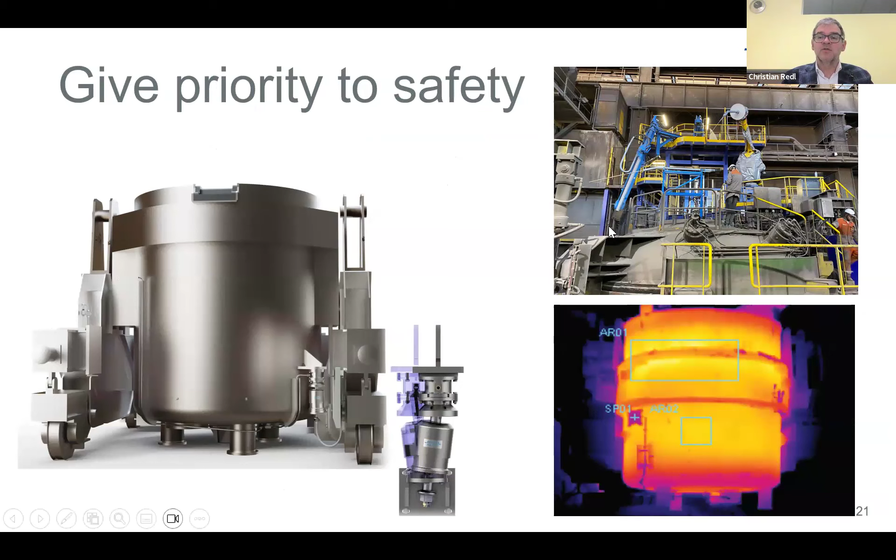One tendency is, of course, also not only to have the hard facts on the plant, but also to give some priority to workplace safety. So we have developed several tools like the automatic gas coupling system, and also robotic solutions. An example here is a temperature and sampling robot for a vacuum degasser, so that you minimize the operator factor - you do the sampling always in the same manner, and you not only use some kind of manipulator, but really a robot to manipulate all those samples and to remove as much as possible the workers from the high temperature area around the plant.

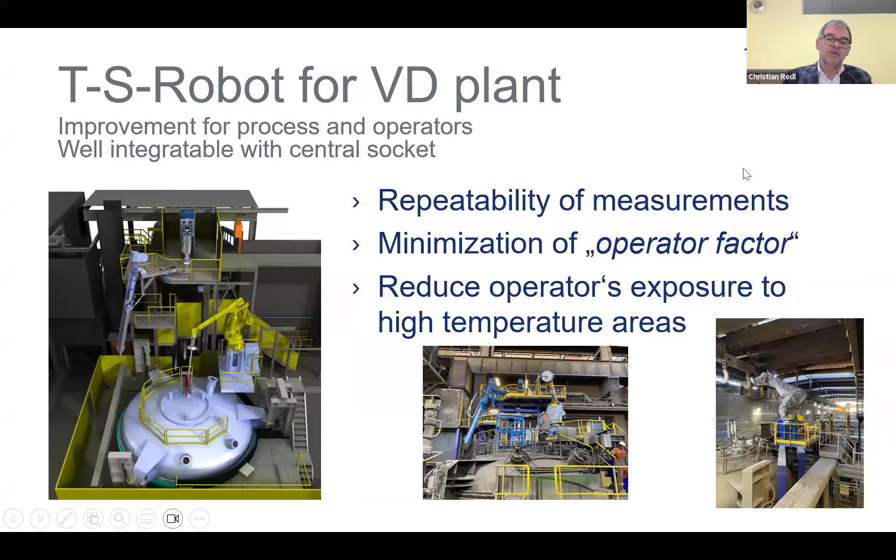Coming to an end, let me show you an automatic gas coupling system. As I said, the degassing efficiency is very much dependent on a very good stirring of the melt through the porous plug at the bottom of the ladle. For this, we've developed this automatic gas coupling system, where I simply put the ladle on this coupling device. It couples automatically, has a metallic sealing, is very high resistant and therefore suitable for the tank degasser. Once again, you remove any manual worker from the area close to the ladle.

Thank you once again for the opportunity to give this presentation. I hope it was a good overview of the possibilities for vacuum treatment, and thanks again.

Thank you, Dr. Christian. This is really a very, very good presentation. You went through a lot of practical stuff in a steel plant. Thank you very much. I have one question for you.

You mentioned that you guys use a bottom porous plug for stirring during vacuum degassing. Some steel plants use electromagnetic stirring. Can you give us a small comment about what is the real difference, and which technology you prefer - electromagnetic stirring or direct inert gas stirring? I would say the difference is, of course, the share of the bottom stirring by argon gas is much higher than the electromagnetic stirring.

There is of course in the slag zone a higher wear, and therefore you might use different types of refractories on the ladle, on the metal area compared to the slag area, and of course this is also because of the temperatures - if you do oxygen blowing, this can be rather high. So there is also this high temperature wear mechanism on the refractories, of course.

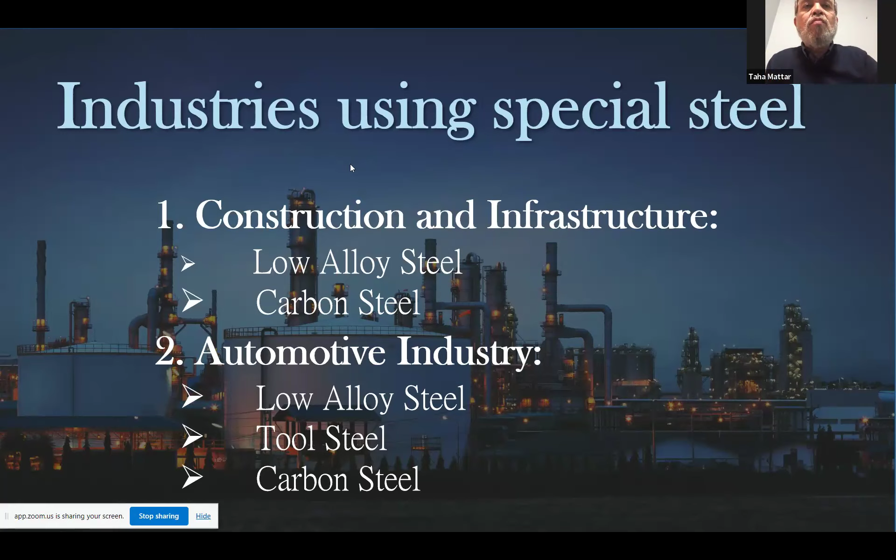Considering construction and infrastructure, as we see in front of us, they consume low alloy steel and carbon steel. Automotive industries consume low alloy steel, tool steels, and carbon steel.

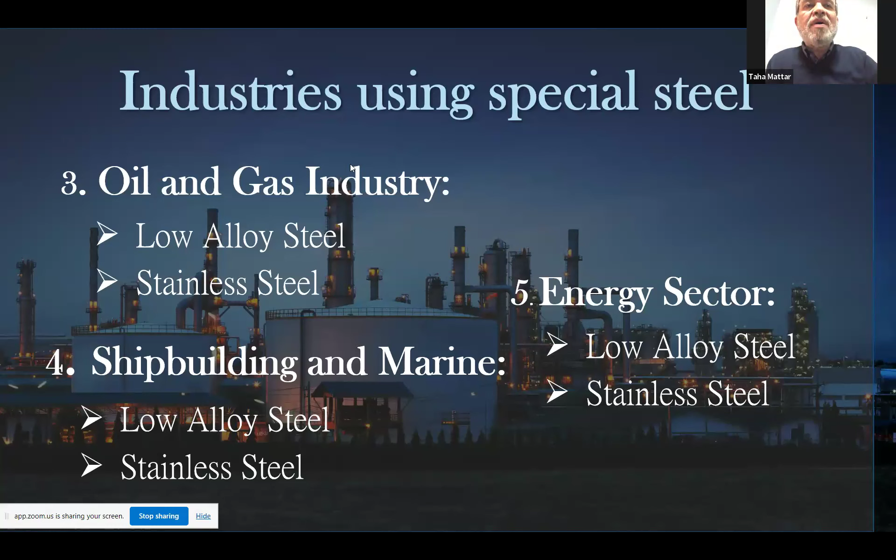For oil and gas industries, they need low alloy steel and stainless steel. Energy sectors need low alloy steel and stainless steel. For shipbuilding and marine, we need low alloy steel and stainless steel.

Manufacturing and engineering mostly use tool steel and carbon steel. For railways, low alloy steel and carbon steel. Defense and the military use tool steel, stainless steel, and carbon steel. From this, we can see that most applications concentrate on alloy steel, carbon steel, tool steel, and stainless steel, and most construction applications use low alloy steel.

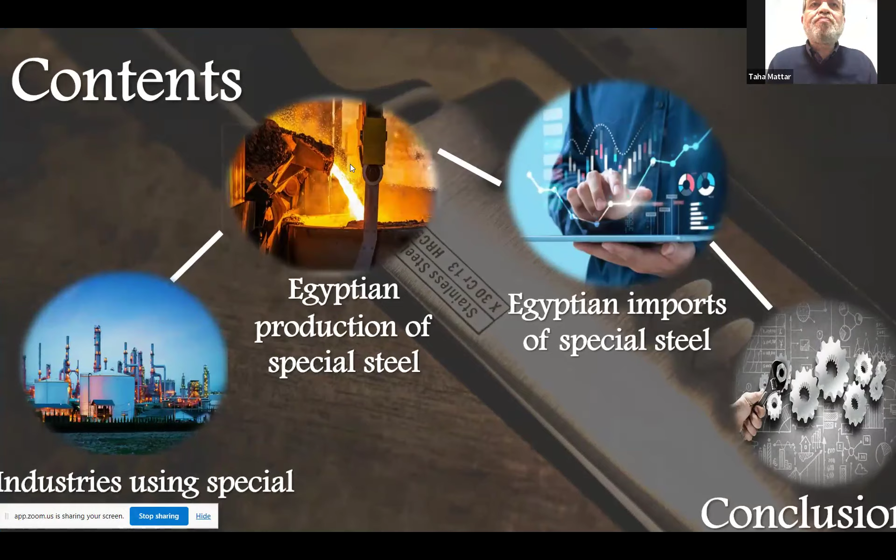So the Egyptian production of special steel - we have only three main sources for alloy steel in Egypt. The first is Arco Steel, and we had a comprehensive presentation from Engineer Ahmed Hammam that actually covered everything about Arco Steel.

We have Factory 100 military factory, Abu Zabal Engineering Company, and our special steel casting foundries. They are our main resources for producing special steel and castings made of special steels in Egypt.

In Arco Steel, I will not talk a lot because Engineer Hammam covered everything. They actually cover a good panorama of special steels like stainless steel, free cutting, spring steel, case hardening steel, quenching and tempering steel, with annual production mostly 180,000 tons per year.

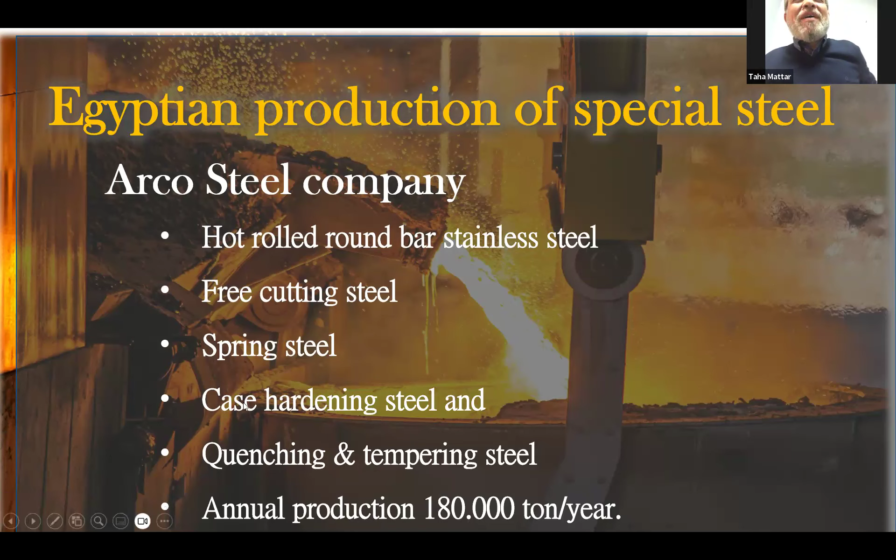Factory 100 military factory - they produce heavy, medium and heavy artillery, production of tank guns steel, production of special steel, especially weapons steel, and alloy steel rolling mill production.

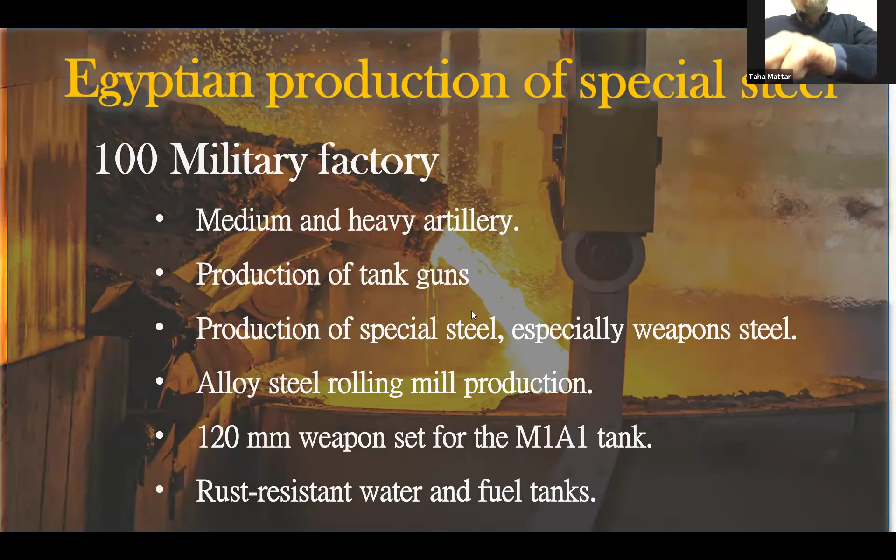They produce the 120 millimeter weapon set for the M1A1 tank. They also produce rust resistant steel.

We should know if this production of special steel covers our Egyptian needs or not. Of course not. We will look at these three resources, Factory 100, Arco Steel, and the thousands of foundry shops around Egypt. They are producing castings and products made of alloyed steel and special steels, but they are not enough for our Egyptian market. Now we will go through what else we have from steel as imports.

We will go through the last 3 years, 2021, 2022, 2023. If we are talking about cutlery, we will divide all steel products according to application or type of alloy. For cutlery, we imported in 2023 $144 million in products. It was $123 million in 2022, and $136 million in 2021. We see there is an annual increase from 2021 to 2023.

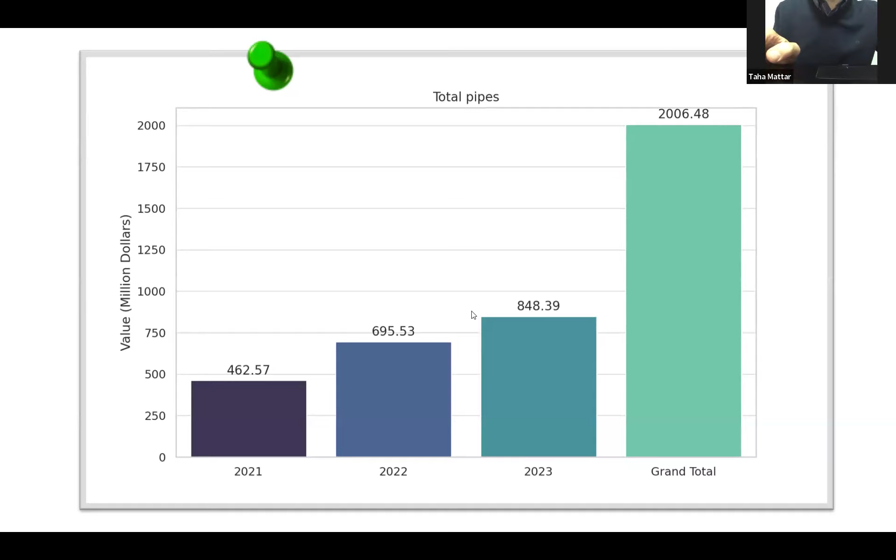Going to total pipe imports in Egypt, we know the revolution in construction in Egypt, thousands of kilometers of roads and infrastructure for new industrial zones. We imported in 2023 almost $850 million in pipe products made of special low alloy steel, with an annual increase of almost 20%.

Going to the types of base metals, here we are talking about importing metals, steel that serves as raw material for machining and manufacturing. In 2023, we achieved $130 million in imports for this grade.

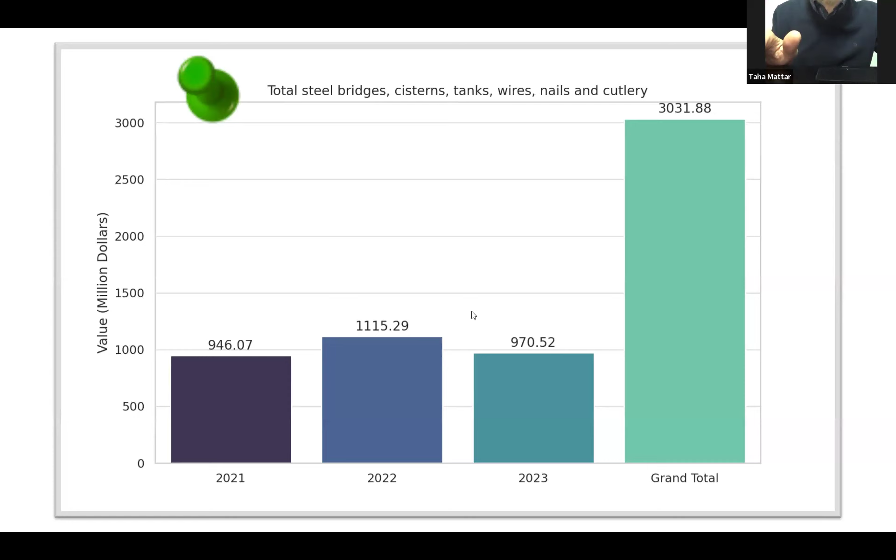Going to one of the most important imports or needs in Egypt, for bridges, cisterns, tanks, wires, nails, and cutlery, we imported during the last 3 years almost $1 billion in products every year.

So if we look at the imports for steel for engineering applications in Egypt, for total weapons we have a big decrease from 2021 to 2023, from $16 million in imports to only $1 million.

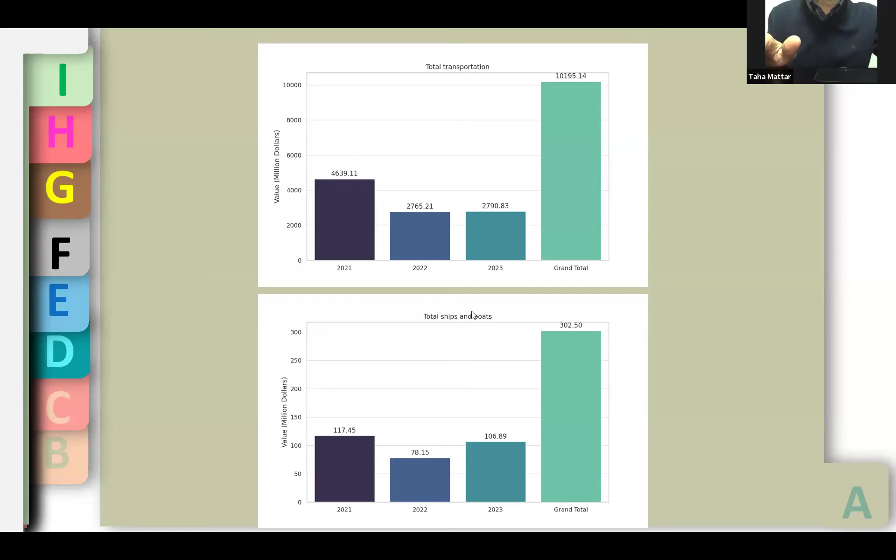Considering electrical appliances, we know all appliances are made from steel sheets, low alloy steel, and the imports decreased from $3.2 million in 2021 to $1.8 million in 2023.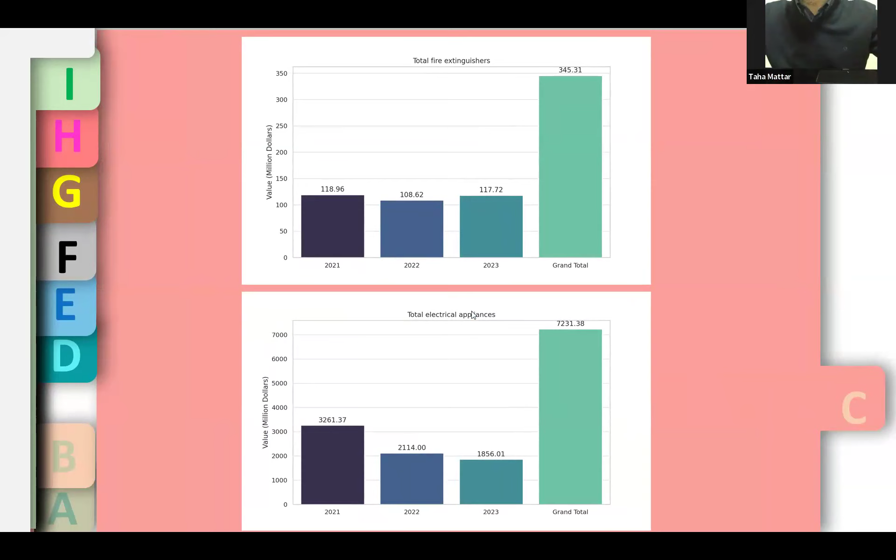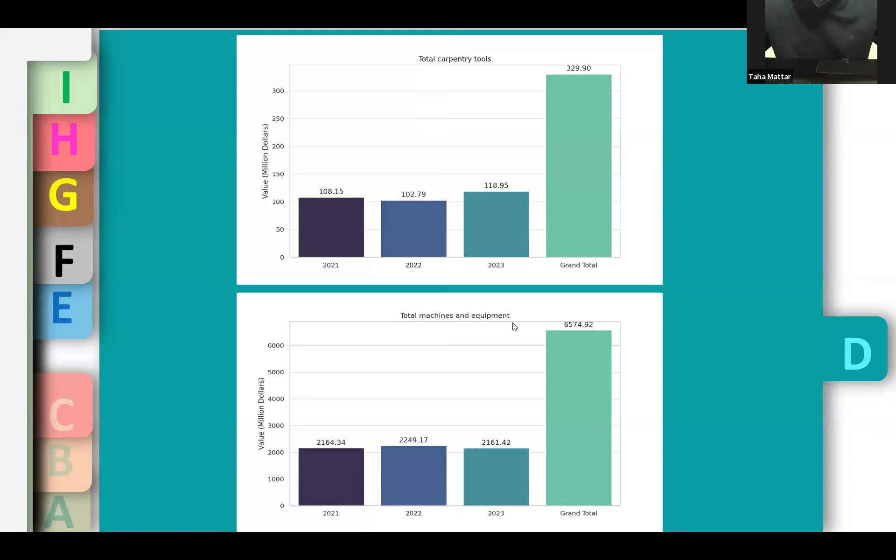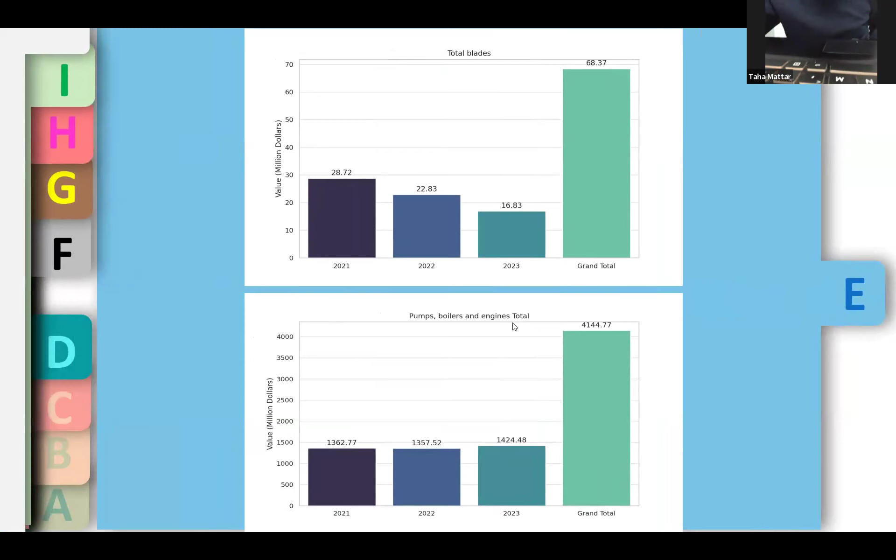Considering boilers, engines and pumps manufacturing, we have many industrial zones in Egypt producing boilers and pumps, importing special steels and low alloy steel for manufacturing these products, with an amount of $1.4 billion every year.

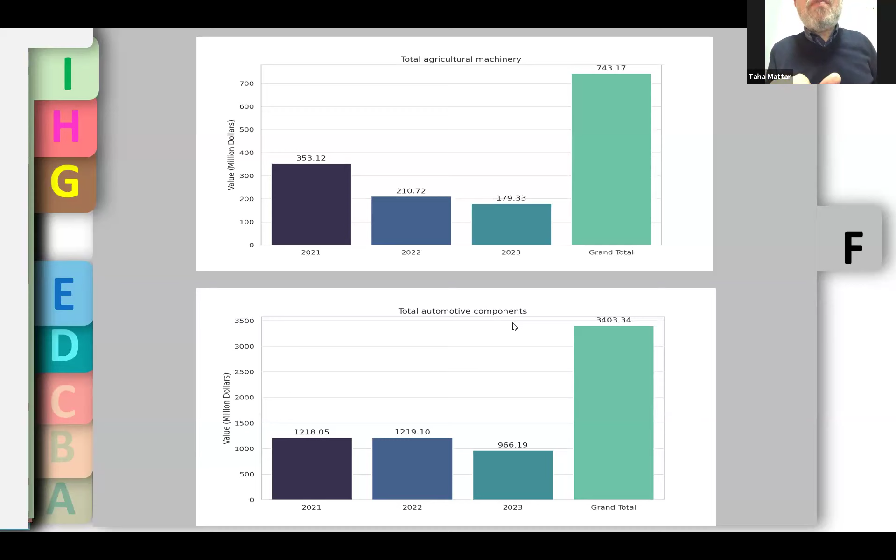Agricultural machinery shows a decrease from $350 million per year to $180 million in 2023 for imports used in manufacturing agricultural machinery. Considering automotive components, as mentioned by colleagues, stainless steel, high alloyed steel, and low alloy steel are imported mostly about $1 billion in products every year.

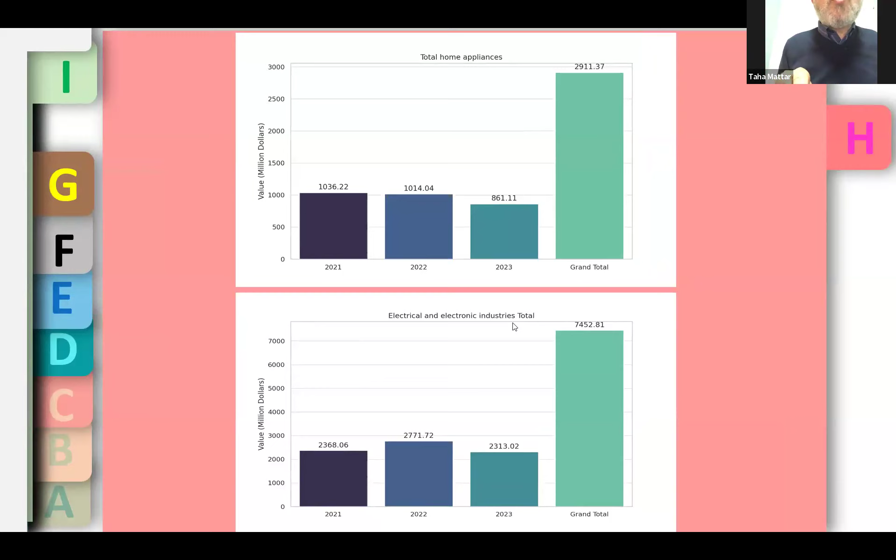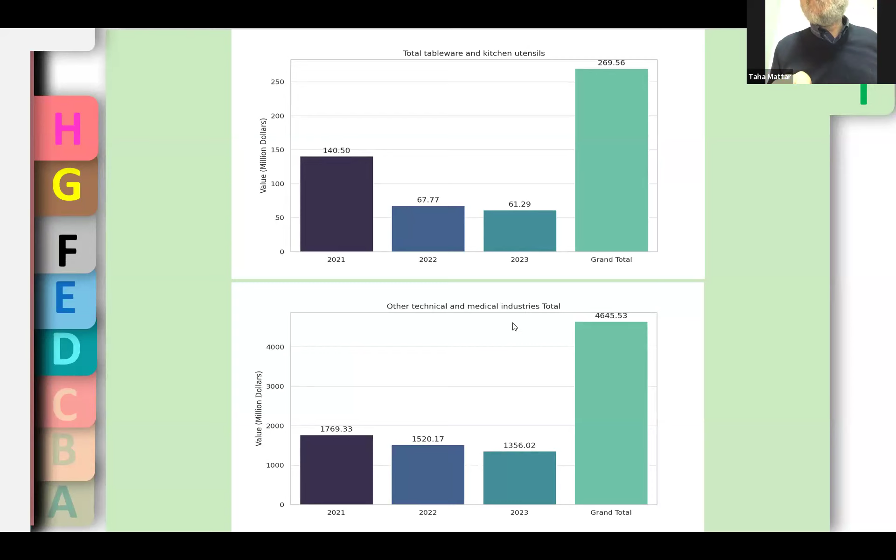Other technical and medical industries: we imported about $1.7 billion of products or materials in 2021, arriving to $1.356 billion in 2023. Next, please.

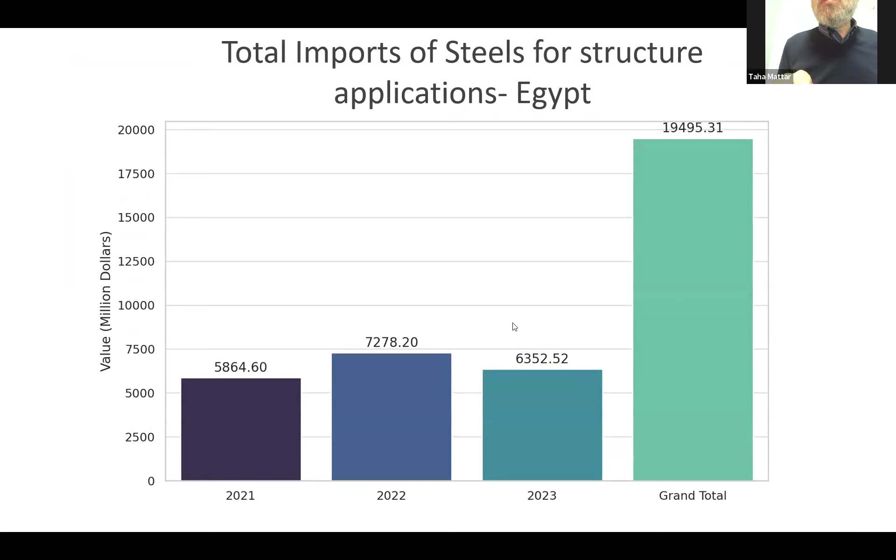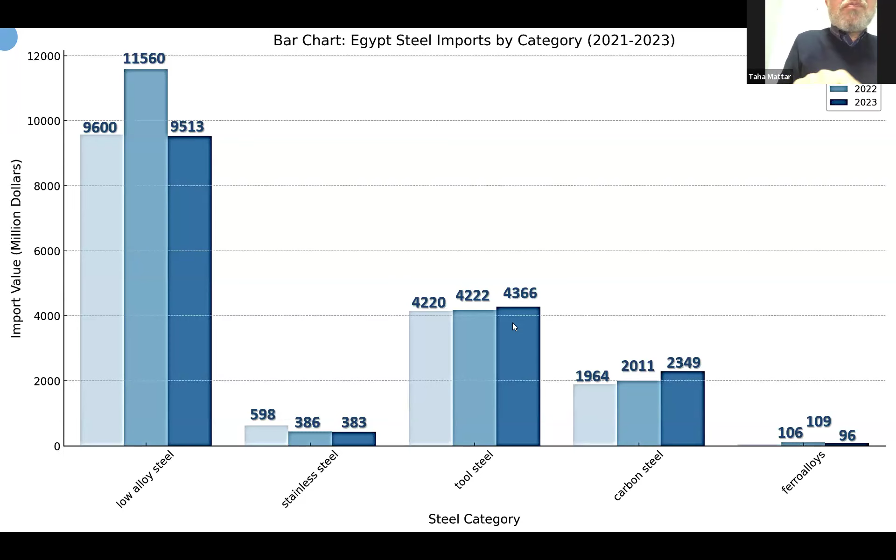Thank you so much. Thank you, Dr. Hammam, really very, very good presentation. I also like the slideshow way that you have, it's really very good. No, thanks to my assistant, Hassan.

They used to make some good work; by the way, we are a steel family. We have a steel technology department full of scientists working only in R&D of steel, mainly going from low alloy steel, achieving stainless steel, tool steel, maraging steel, triplex steel. Also, we are now working on new grades of steel for hydrogen tanks and hydrogen transportation pipelines and tanks, as well as new grades of economic weathering steel. So I should thank my team, my family of steel.

Thank you very much, it's really a very good summary, a very good market survey for the special steel market in Egypt, and I believe this can also apply to the MENA region. So a question for you, and maybe Mr. Hammam will have another answer for this question after.

Do you think, if you were an investor, it makes sense to invest in a stainless steel producing plant or in carbon steel? What do you think is better, Dr. Taha? For me, stainless steel, but even better than stainless steel is tool steels. Tool steel, yeah, low alloy. I'll tell you why.